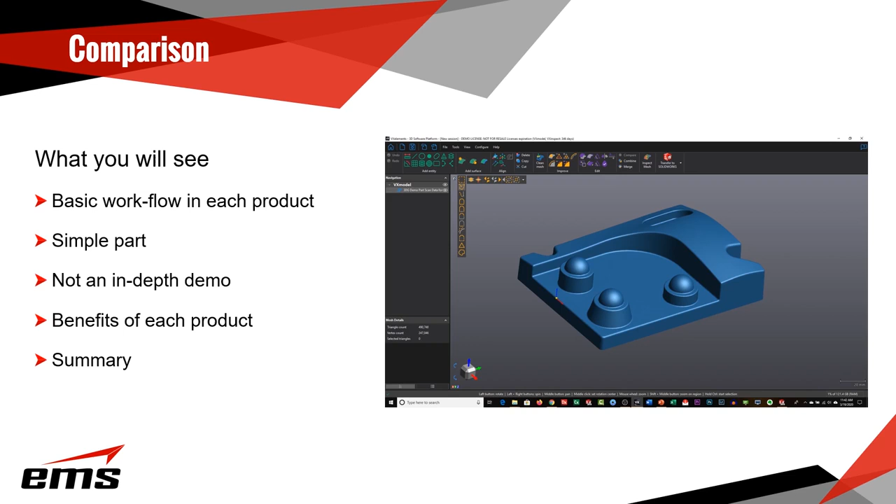And finally, we'll just kind of show a summary of the three different products and how they compare to each other. All right, so we are going to get started in VXmodel.

Now, what is VXmodel? VXmodel is sold by Creaform, so if you're using a Creaform 3D scanner, this could be a nice add-on because it allows you to kind of stay in the Creaform world, so to speak, for the most part.

You're going to see the workflow here in a minute. But basically, if you have a Creaform 3D scanner, you do all your scanning, and then you open up VXmodel, or just say import into VXmodel, and it brings that scan data straight in. It is an add-on product. The basic product from Creaform is called VX Elements, and that's your basic capture software, included when you buy a scanner. VXmodel would be an add-on.

So basically, when you're done scanning, you tell it you want to start modeling. So you'll see our model here. It was just a small plastic part. We scanned the top of it, didn't bother with the bottom because it's flat. And you can see that scan data.

So what we're going to do now is kind of show you what the workflow might look like. Now, just real quick, the interface - pretty typical. You've got a ribbon interface across the top, some different selection tools you see here, your modeling tree over here, and just some other details.

So the first thing we need to do is extract information, because the way this product works is we extract information from the scan data, and then we take it into the CAD system of choice and do the actual modeling. So we'll do a few things, and it'll hopefully make sense.

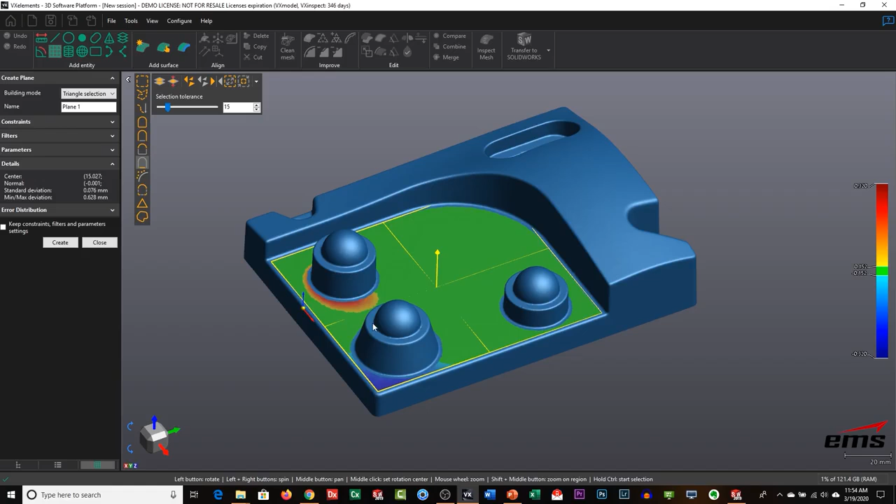So what I want to do is basically create a plane. One of the selection tools in here is called similar curvature, and if I click on the part, it's going to look at the curvature of everything and just select, in this case, what's mostly flat. And I'm going to go in here and say create a plane and hit - and you'll see it gives us, within a tolerance, what's everything in green is flat. We can see some blue and red - that's just telling us it's fit a plane through here, but it deviates a little because probably the part has a little bit of warp to it, but we're good with that.

So we've built our first plane. You can see it's right on there. So now I really don't have anything to set up that bottom plane, so now I'm going to create a plane by doing a plane offset, and we're going to select our first plane, and let's get this in kind of a side view so we can see it. And based on the vector direction, I want to go down, and I'm just going to manually click this.

So let's try maybe 12.5 and see how that looks. I'd say, yeah, that looks pretty good. And we'll create a plane, because it would be very difficult to try to pick the edge down here. Edges of scan data are never really reliable.

So that's given me two planes. I've identified this top plane and the bottom plane. Now, this out here is very curved, so we're going to have to do something different for that. But let's start with this.

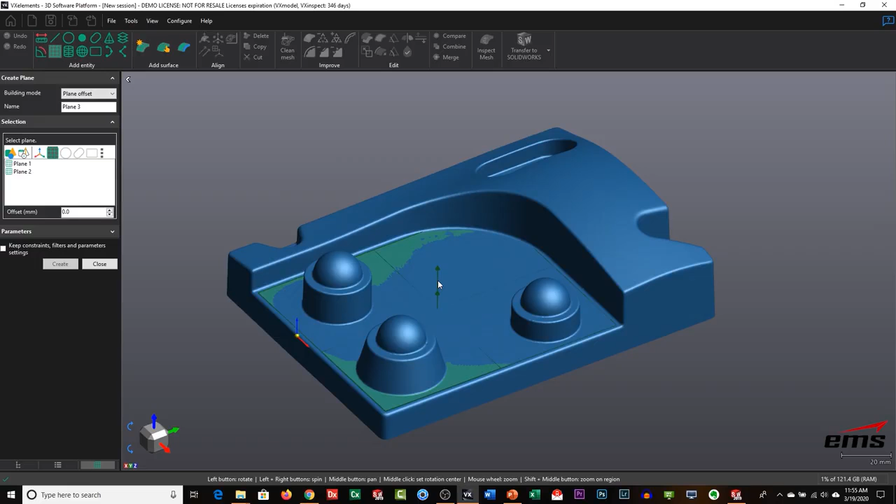So now I want to start extracting some basic profiles. I've got my two major planes here, and now I'm gonna get some profiles, and then we're gonna take all of this into, in this case, SolidWorks. We'll talk more about that in a minute.

Okay, so first thing I'm gonna do is create a cross section, and I'm gonna pick an existing plane. Let's start at the bottom, so that would be plane 2. And we don't want to cut it right at the bottom edge here because that data can be unreliable, and you can see the part's not perfectly flat on the bottom. So maybe we come up, let's try 0.1 and see what that looks like.

Maybe a little bit more. We want to try to get it to a point where we've got that line all the way around, which looks like we do. We don't want to go up too far because we have draft on this part. I'll say, yep, that looks good. And it's going to create that first cross section.

And then we're going to want to take one here because this is another prominent feature. So that was, I believe, plane 1. And this one we're probably going to want to go up a little bit more because we want to get away from the radius here. Maybe 1.25, let's see how that looks. Right, so we want to get off that radius, because the radiuses we're going to put in later. And we'll go ahead and say create.

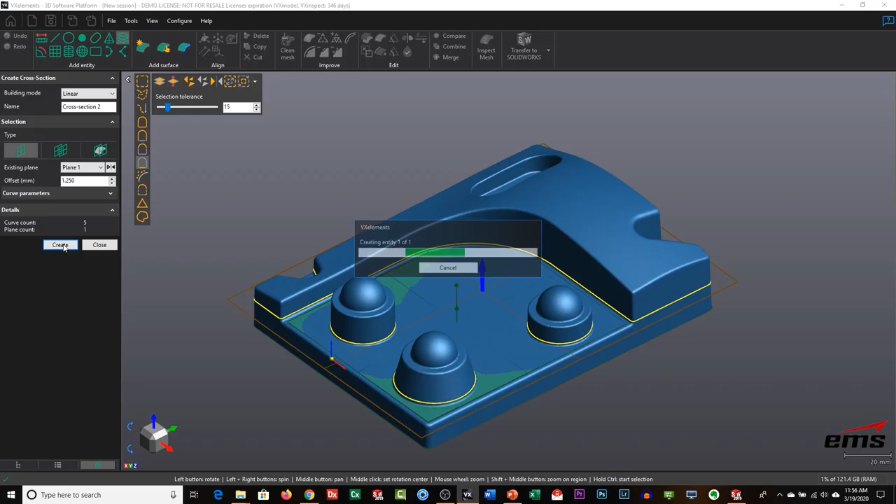So we've basically created the main bottom profile and then this cutaway profile. And we will repeat that process for the rest of these features, but we'll come back to those because we can do this in steps.

Now, the other thing, it's obvious right away that this has a lot of curvature to it. So we're not going to be able to just do a kind of a blind extrude. We're going to need to cut it off with this. So over here we've got some surfacing tools. There's auto surface, and that'll just build a whole patch of surfaces on the part, but it's not very intelligent. That's great for a very organic part. It's not good for a part like this.

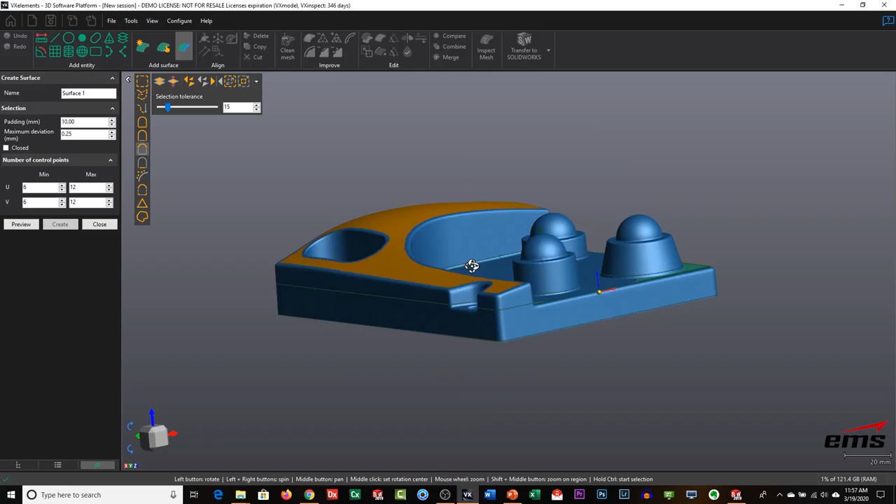And again, we're going to try that similar curvature feature because basically we're going to want the surface to fit to that. Let's see what a preview would look like. And we can adjust the amount of control points, how tight deviation-wise we want it to touch. If we really want to crank this down, let's try 0.1 and do another preview. That'll pull it down even tighter. So you have a lot of control over how well that surface fits. You can see we're extending out, which is fine because we're going to actually use it to cut later. So let's go ahead and hit create.

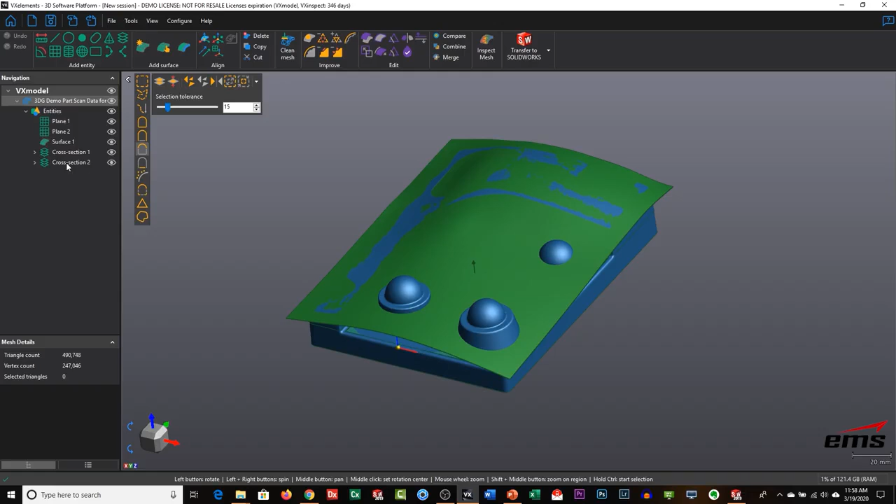Okay, so let's close out of here. And if we look at our entities in our tree, we've got a couple of planes, a surface, and a couple of cross sections. So that's enough to get started.

So the next step is to transfer this. Now we have two choices here. We can go to SolidWorks, Inventor, and Solid Edge right from here, or we could basically export out the geometry into like an IGES, STEP, or Parasolid. So we'll have different options. But since we're using SolidWorks in this demo, I select all the geometry, and then I hit Transfer to SolidWorks.

Okay, so here we are in SolidWorks. So the data is automatically transferred over. And if you look at what we have, the top surface, and then the two cross sections, and then the two planes that we created.

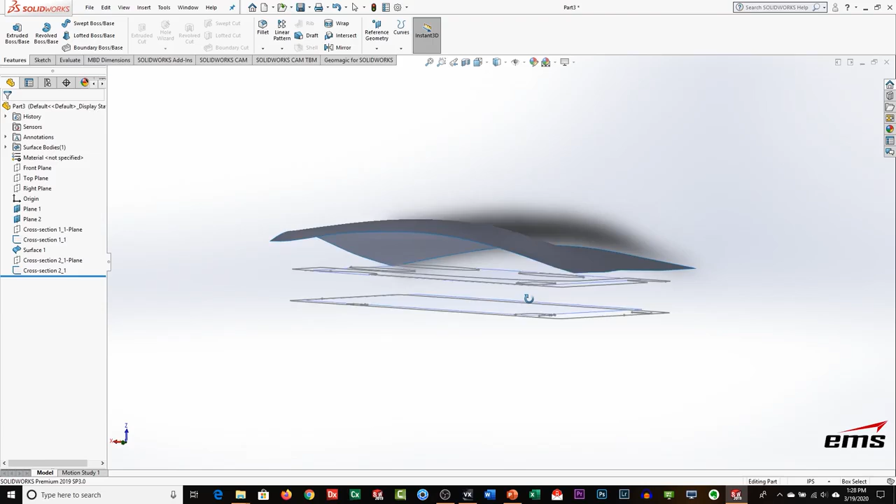So I like to kind of hide the things I'm not working on. It just makes things easier to work with. So I'm going to hide plane 1, and I'm going to hide cross section 2. And so now we just have plane 2 in that cross section.

Now, why did we bring in the plane and the cross section? Because if you remember, they're not at the same level or the same height. The plane is right at the bottom of the part, and the cross section is up just a little bit so we can get that nice cut.

Also, what is this cross section? Well, it's a polyline, just a bunch of points on a line, not a line like a 2-point line. And if you had fillets or radiuses, they wouldn't be - it would just be points. So it's not the best geometry to be solid modeling from.

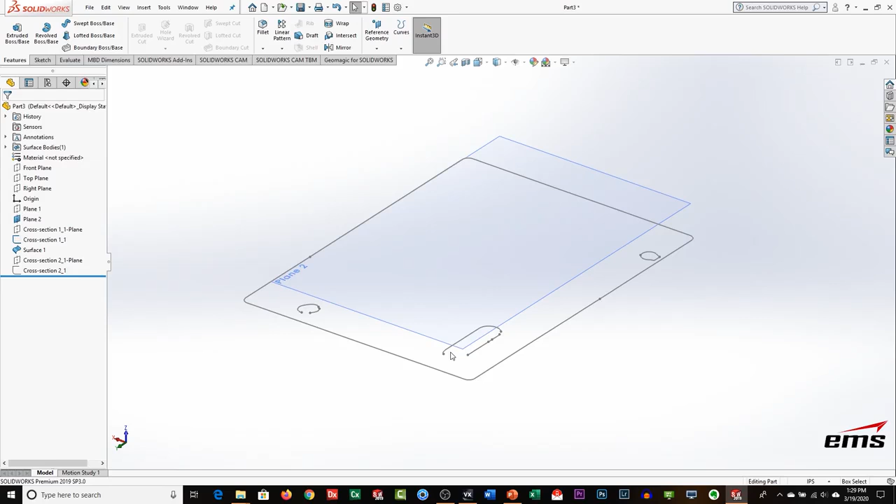Also, you can see it's incomplete. If the scan data isn't complete right there, you're going to have holes in it. So what we're going to do is just use it as reference geometry and build new sketches.

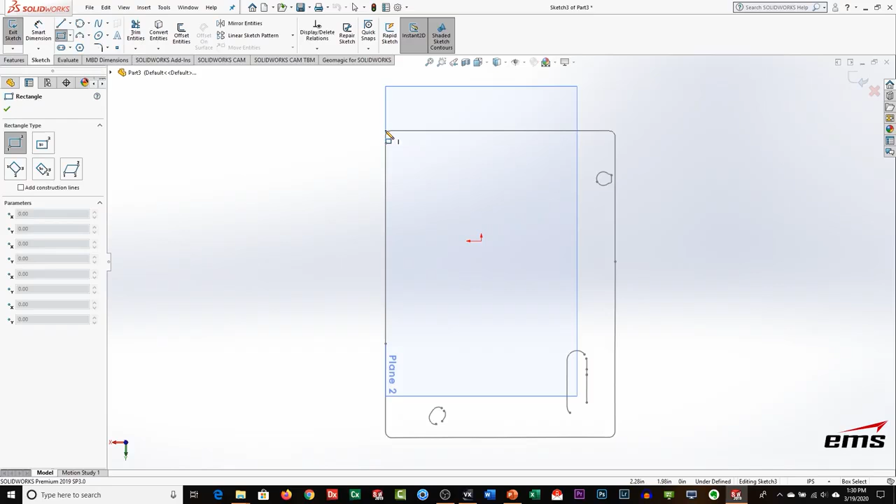So what we're going to do is go to the sketch command and pick this plane because we know it's right at the bottom. Let's go ahead and get into a top view. We're going to basically trace around this geometry, but with the real sketching tools in SolidWorks. So I'm just going to line up the corner, then come down here and line up and try to get right over the top and build that first rectangle.

Now, the rectangle, of course, things will be parallel and perpendicular. You can add other things if you want to dimensionally drive this and add all that, you can do it. We're not going to, for time in this demo, show all that. But you have all your normal sketching tools.

Normally when you scan something, you're scanning the manufactured part, which is not going to be perfect. It's going to be slightly bigger or slightly smaller because of shrink and different manufacturing processes. So you can override all that just like you would on a normal sketch.

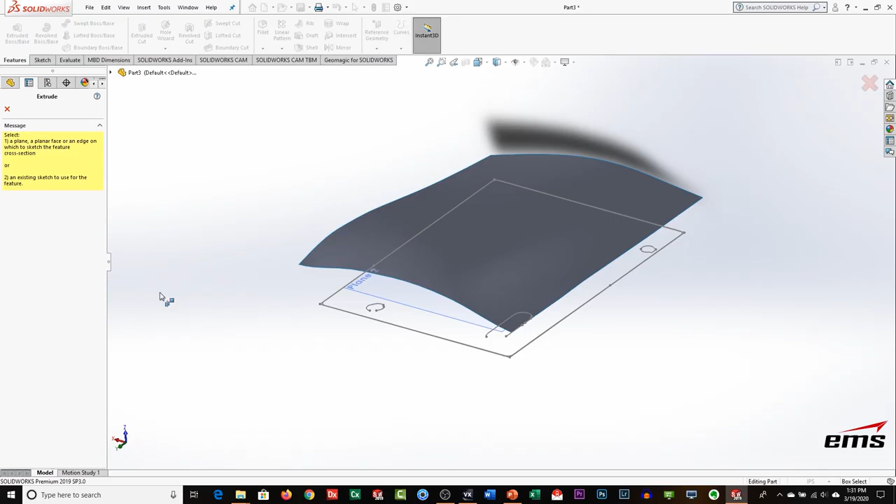Okay, so there's our first sketch. We can now exit out. And now we want to turn back on our surface, and we are going to go to Features. Again, we're using all SolidWorks commands, and we are going to want to extrude, using that new sketch we created.

Now, we don't want to go blind. We could, but we know the top of the part has some real shape to it. That's why we extracted that surface, and now we can use that to automatically fit right to it. The only other thing we want to do is add draft, usually 1 or 2 degrees for an injection mold in this case, and then hit OK.

So let's go ahead now and hide that surface, and you can see very quickly what we have. We have a nice, the major shape of the part with that very complex, very organic top that it has, very quickly.

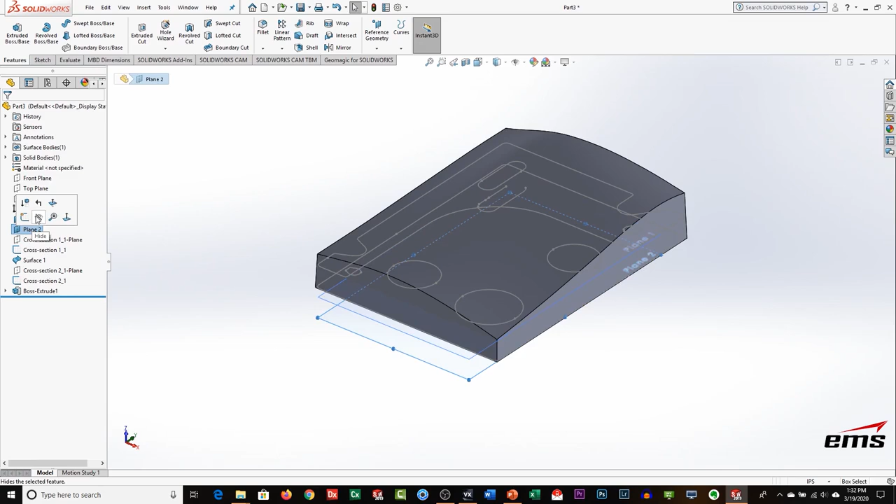So next, let's go ahead and show the other cross section and turn on the other plane. Let's hide this one and hide this one - for me, it just makes life easier. Okay, so we pretty much want to do the same thing. We want to now make this, in this case, a cutout. So same process: we come in here, we hit Sketch, we pick our plane.

Let's go to a top view, and then however you would trace over this. So I'm going to start with a line here and just run it out - doesn't matter where it goes. And let's go here and same thing. And then we'll just kind of close it off out here somewhere.

And then the last thing we're going to do is create our fillet, and that'll be here and here. We want our fillet here and there, and let's type in our amount. Let's try 1.5. Let's try 1.75 and say, hey, that looks pretty good, and go ahead and take it. Then now we'll go ahead and exit this sketch.

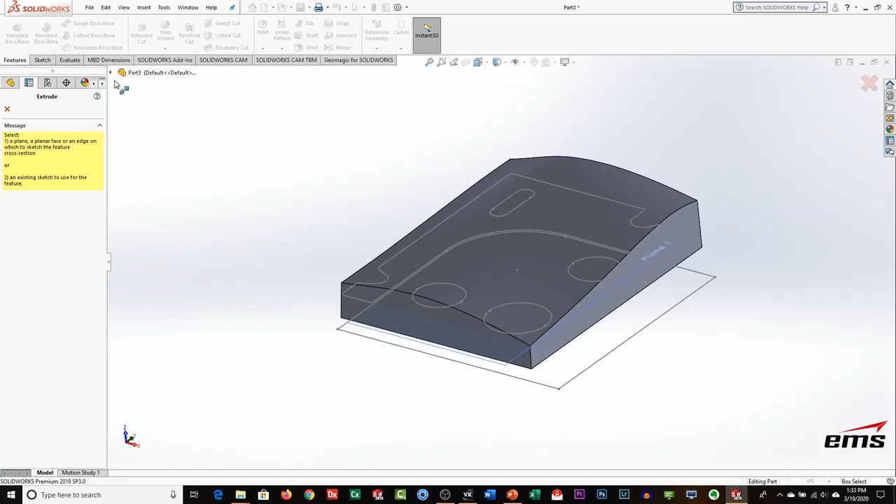Okay, so there's our second sketch. And now we are going to want to do an extrude cut, and in this case, sketch 4.

We're going to go up. And then for this one, we're going to want to also add draft, but we're going to want to draft outwards, right, because we're going to cut it away. So let's go ahead and hit OK. That's going to give us our draft.

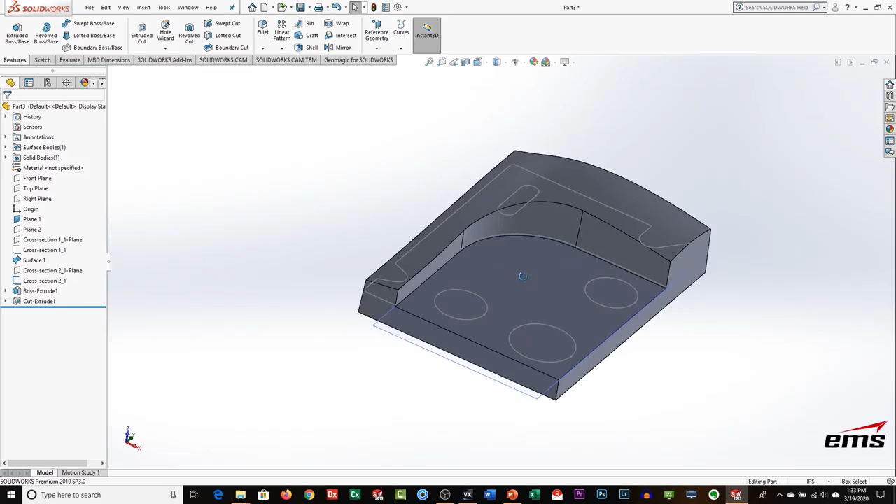So again, very quickly, we have created a good majority of the shape. That's bringing in a couple of sketches and doing some extrudes and cuts. Next, let's show what you might do with some primitive objects, some primitive surface or solid objects.

Okay, so we're back now in VXmodel, and we want to continue on. Let's go ahead and hide the surface and those two planes for right now. And let's take a look at this geometry here.

So we're going to do this geometry a little bit different because these are more prismatic shapes, cones, cylinders, spheres, things like that. So what we're going to do is extract that information as primitive geometry and then take that into SolidWorks. So let's start with the spheres.

And again, we're going to use that curvature-based selection tool and then go ahead and hit Create there. Create there, and create there. So what this has done is it's actually built solid model geometry by fitting through that scan data.

Now you could also set up a center axis and then cut a section and then do revolves. That's certainly a way to do it, but I thought we would show some of the other commands. Now, let's go ahead and do these.

Theoretically this is certainly a cone, but actually these two are cones too, in the sense that we've got draft on these walls. So we could do it either way. We could do it as cylinders and then change it in SolidWorks. Let's just go ahead and try to do it all as cones.

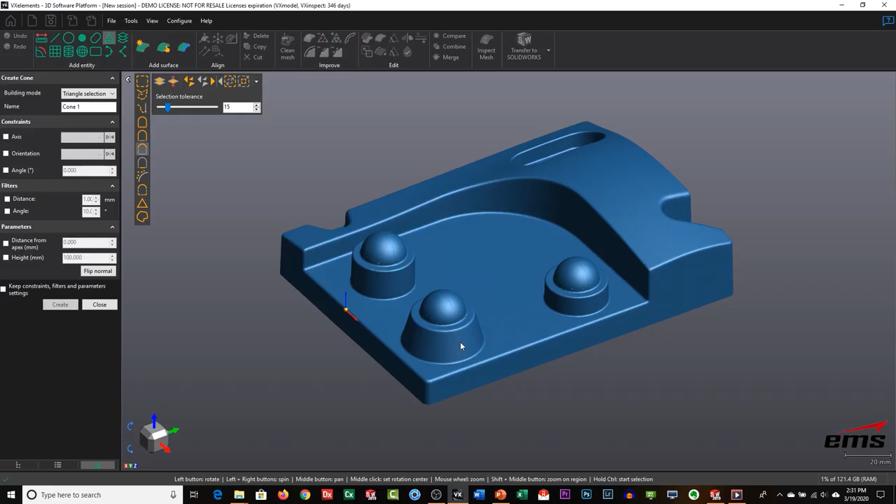So now what we're going to do here, because the way that curvature-based works is it's going to stay away from the corners because of the radii there, right? And so you can see our geometry then only fits to where our selection was.

Now, we do have some things we can change over here, like the height or the distance from the apex. So, for example, if I change the height, let's spin this around so you can maybe see it from underneath. You can see, and I'm purposely, what I want to do for this is just get the bottom to go down a little bit farther.

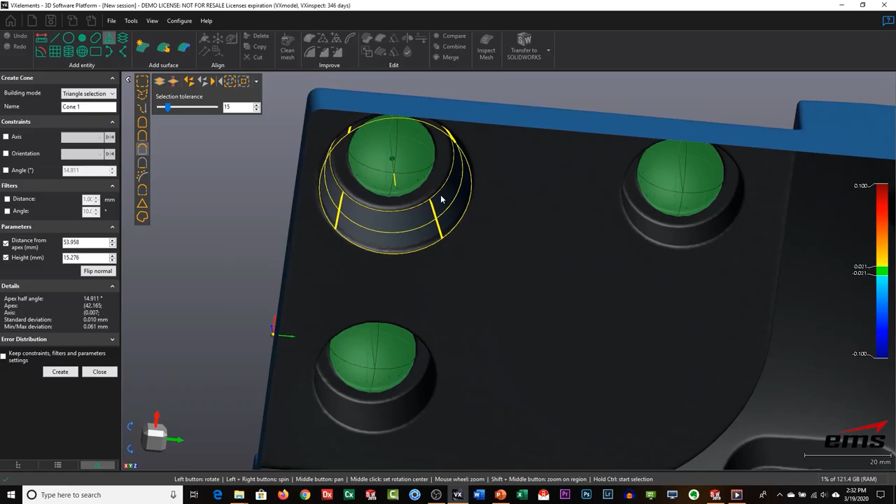This will make sense here when we go into SolidWorks. The top I'm not so worried about, but the bottom I want to carry that curvature down into the part a little bit, and then I'll hit create.

Okay, so we'll do the same thing here with that. Let's flip that over, and let's increase that one a little bit as well, and hit create.

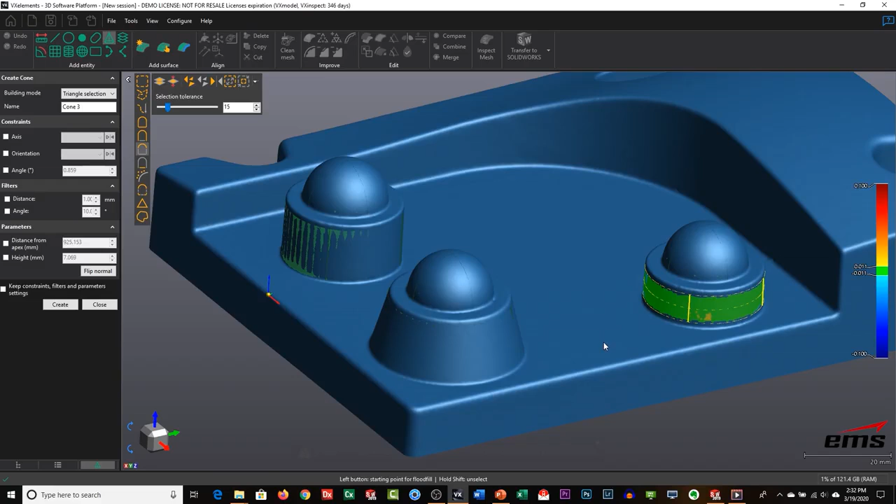And then finally this one here, and change that height. Okay, and that's good, and then we'll hit create.

Okay, so once we have those, now I'm going to need a couple of planes. If we look at the, let's call it the shoulder or the top flat area here, there's a couple ways we could do this. We could certainly offset this big plane and move it up. That would probably be the right way to do it to make sure it's parallel.

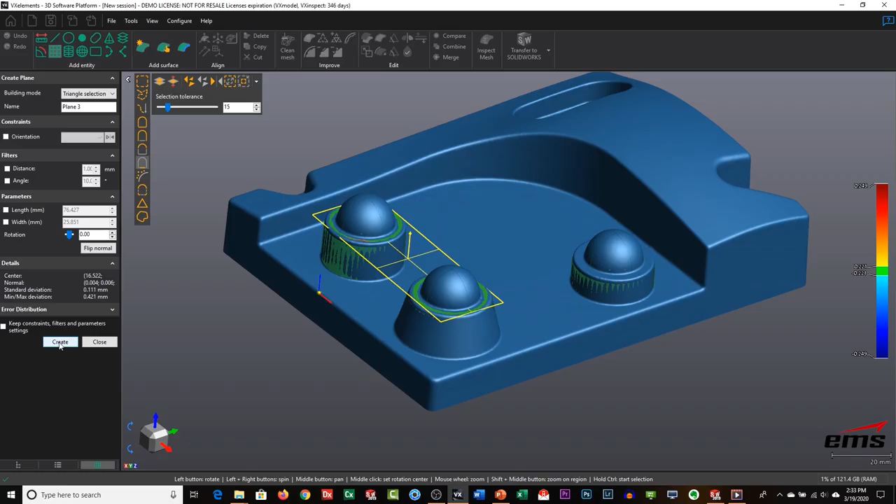If I'm not real worried about it, I'll just do it this way, and I'll sample data from both of those. The only danger here is it's not guaranteed it's parallel from this, but just to kind of show you a couple different ways of doing things, we'll just go ahead and do it.

And then same over here. And the reason I need this one is because it's at a different height. Okay, so let's close that.

Back to our tree. So we're going to want this plane, all three spheres, and then all three cones. Okay, and just like before, we hit the transfer to SolidWorks button.

Okay, so now we're back in SolidWorks, and what's nice about this is you can go back and forth, and it automatically just keeps bringing in and updating your current model. So you can see we've got our geometry in here, and first thing we're going to do is take and edit some of these features.

So we'll grab this one here, and we're going to change it from a blind extrude to up to surface. And we're going to pick that plane that we created that we know is at the correct height. And then we'll do the same thing here. Change that up to surface and pick that plane and hit OK. And then finally this one here.

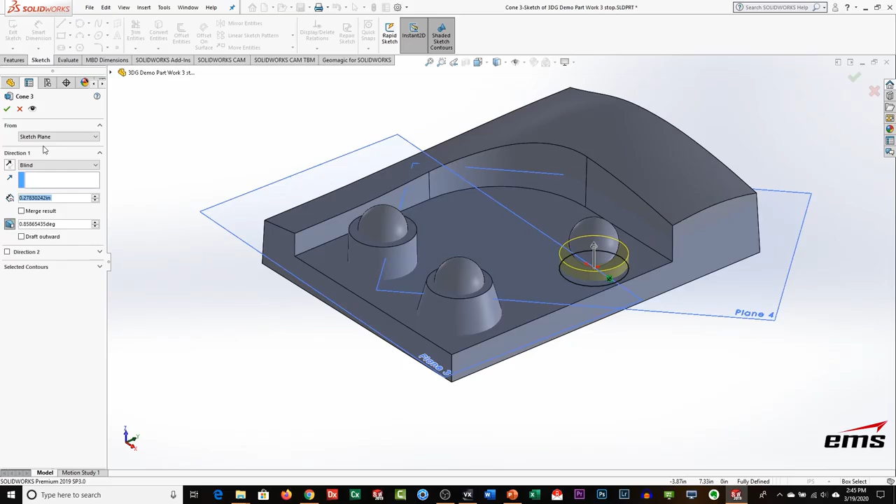Up to surface, and that's plane 4 in this case. We've automatically adjusted the height to be proper on those just by extracting that plane. Now the bottoms, we just ran down into the part, and all we need to do now is go to Insert Features, hit Combine, and combine all this geometry together to make one solid body.

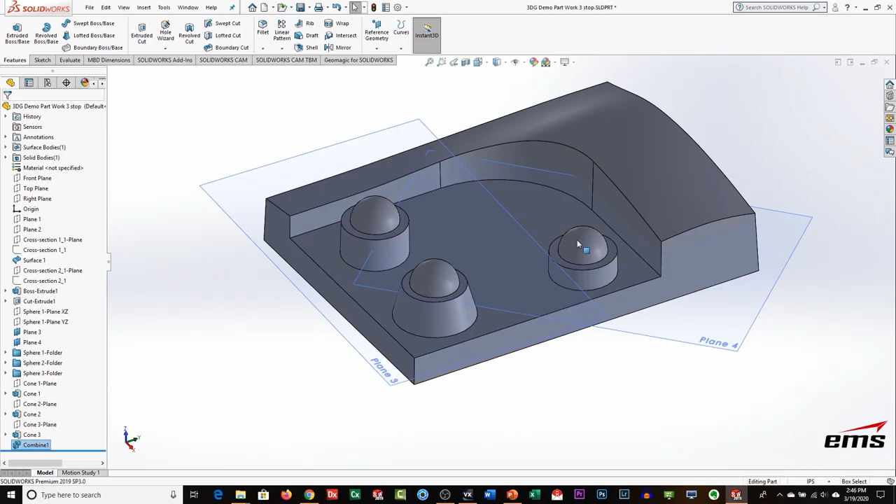So it will get all the proper trims on those. That's how you would do more prismatic stuff. So just to recap, we extracted planes and then cross sections, brought those in, built SolidWorks actual sketch entities, and then did some extrusions, one with a cut for the surface where we extracted.

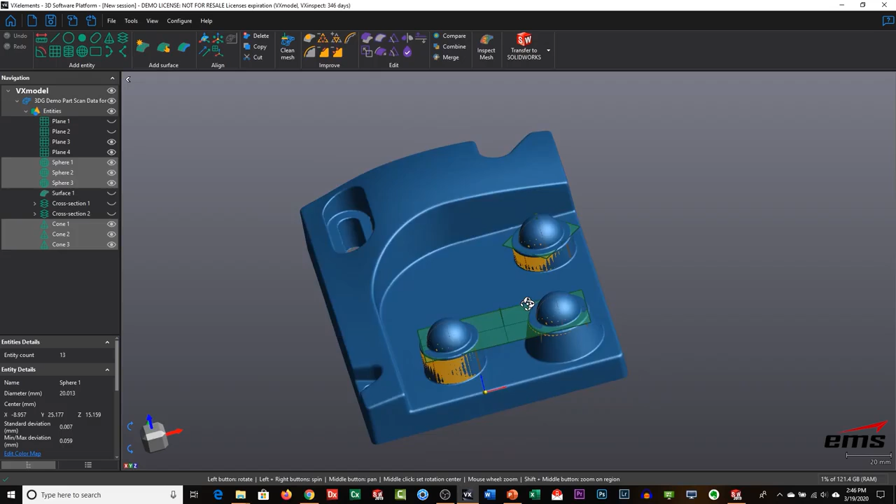Let's go back into VX Elements and look here. So all we really have left is a few more cutouts and holes, and we'll just use cross sections for those, but you get the idea. It's really just the same process over and over.

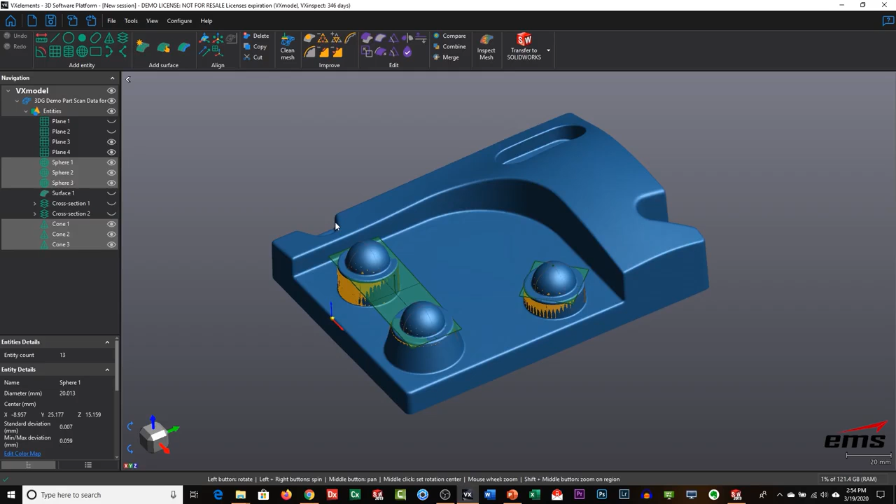So again, in VX Elements, you create some geometry, and then you either extract it straight into SolidWorks, Inventor, Solid Edge, or you export it into IGES, STEP, Parasolid if you're using a different CAD system, and do it that way. It's just an extra step of exporting and then going into your whatever CAD system and importing it. But that's the basic workflow using VXmodel.

All right, so just a summary of VXmodel. Starting with the benefits, one of the main benefits is it works directly with Creaform 3D scanners. So if you're already in that world, you could go right into the VXmodel module just with a click of a button. And it's not to say this won't work with other scanners. Theoretically anybody could buy VXmodel and import scan data, but the typical customer is going to be a Creaform customer. The product is very easy to use.

Creaform has some great e-learning tools and help guides and tutorials, very, very good stuff. It's fairly easy to learn on your own. It has direct links to SolidWorks, Inventor, and Solid Edge, but you can work with any CAD system by outputting those neutral file formats. And finally, it's the lowest price of the three products we're going to show here. Now we're not going to get into pricing because pricing can change and it's different in different parts of the world, but of the three products, this is the lowest priced of them.

And then finally, things to consider with VXmodel: it's not a standalone CAD system. You can't do all those CAD features, sketching, extruding, making drawings, assemblies. You're really just using it as a tool to extract information and take it into a CAD system, so you really have to have a CAD system. And it does have limited features.

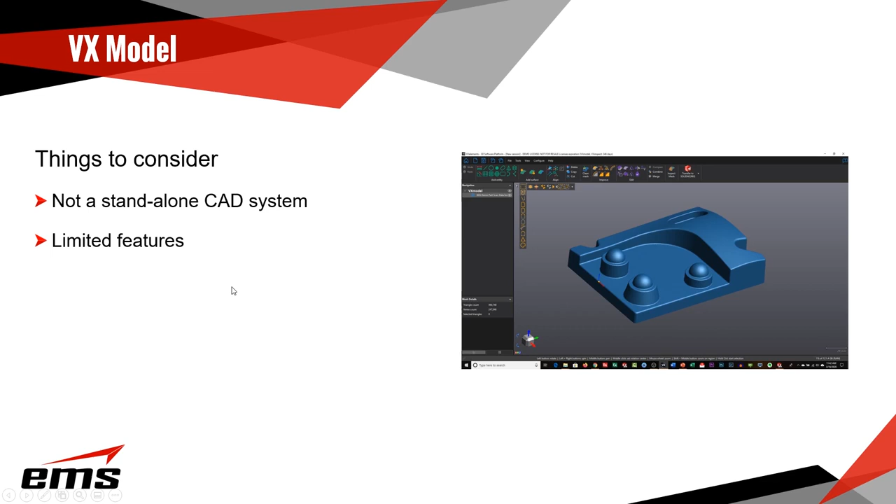It's great on kind of sketch-driven parts and some basic surfacing. There's also some auto surfacing, so you've got some decent all-around tools, not as many as some of the other products, but those will come at a higher price. But if you want a basic system to be able to scan and extract information very quickly in an integrated system, it's a great product to consider.

All right, so next up is GeoMagic for SolidWorks. Now the way this works, let's go ahead and start a new session here in SolidWorks, or a new part. This runs truly integrated inside of SolidWorks, so you'll notice Feature, Sketch, all your normal SolidWorks stuff is here. And then down on the end here we have GeoMagic for SolidWorks, and it's got some tabs, or more of the ribbon style. So the first thing we're going to do is import scan data.

And let's go ahead and import our scan data we created. So we would have exported that, in this case, from VX Elements, but this will work with any scanner. You can even do live scanning right inside the software. I normally don't do that, but some people want to be able to scan right in here. I like to just save it and then import it in.

So here's our scan data, you can see we've clicked the import button. Now you've got some nice editing tools. You have some point cloud tools here, and then you have some nice mesh editing tools. And again, we're not going to go into these, we have other videos that show these in great detail.

But if you need to do some mesh editing, you can do it here. And then really the rest of this stuff is what we're going to be primarily using.

So we're going to start with the region group command, and we select that. We've got some adjustments here for sensitivity and connecting regions. The defaults usually work pretty good. We'll start with that, and if we don't like it, we can redo it.

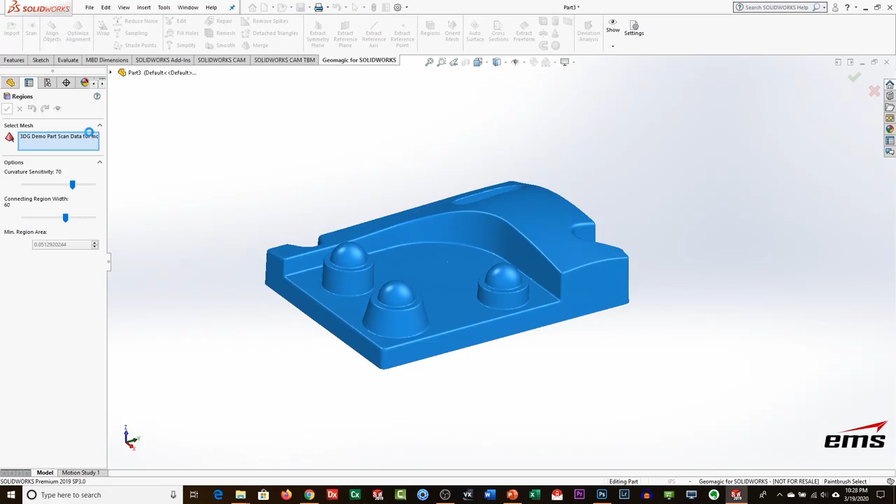What it's going to do is very similar to the VX model command, where we had it select by similar curvature. It's essentially done the same thing, but it's taken the scan data and color-coded the mesh. So you see planes, cones, spheres, even this freeform surface up here. All it's done is color-coded that mesh by groups.

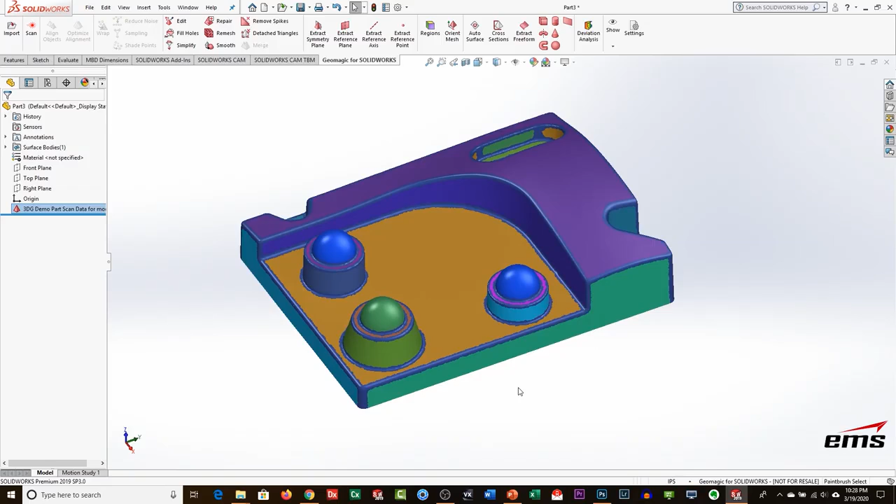It just makes selecting and working with them a little bit easier. We don't always do this, but for parts like this, it makes total sense. So the first thing I want to do, like we did before, is create a plane. I'm going to come to this extract reference plane and use select regions, but you can use other SOLIDWORKS selection tools like lasso. What's nice about the regions is I just click on it, and it's going to automatically fit a plane right through that region for me.

So if we now go to a side view, we'll use the SOLIDWORKS copy plane command, and we'll just drag this down. Again, we can key in an amount here, because trying to create a plane right off the bottom edge of scan data can be difficult. So that gives us two planes to start with, like before.

Let's hide the top plane. Now I want to create a cross section, and I'm going to pick this bottom plane, and we're going to want to move it up some amount like we did before. We don't want to cut right at the bottom. I'll go ahead and take that amount, that's fine, and then that's going to build a cross section through there.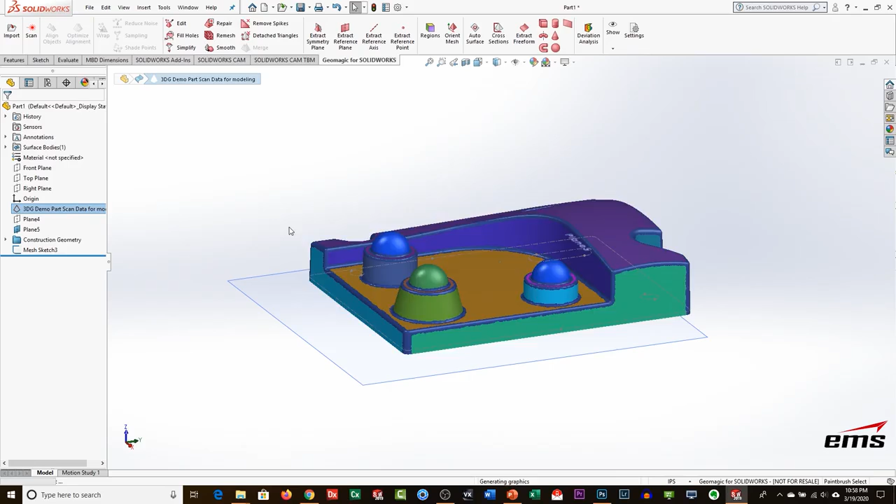So if you turn off the scan data for a minute, let's take a look. What it does is cut this through the scan data and basically build it as construction geometry in SOLIDWORKS, kind of like reference geometry. Theoretically, you could turn that setting off and it would be real geometry, so to speak. But like before, it's not perfect lines and tangent arcs and parallel and perpendicular. It's just reference. So we're just going to use it as reference like we did before.

So we will go over now to the SOLIDWORKS sketch command. We're going to pick the bottom plane, because we know that's right on the bottom. And then we're using SOLIDWORKS sketching tools, so let's do the rectangle again. We'll just kind of get it close, and you can add dimensions and all the constraints you want to add. That gives us our first feature right on the bottom, or our first sketch right on the bottom of the part.

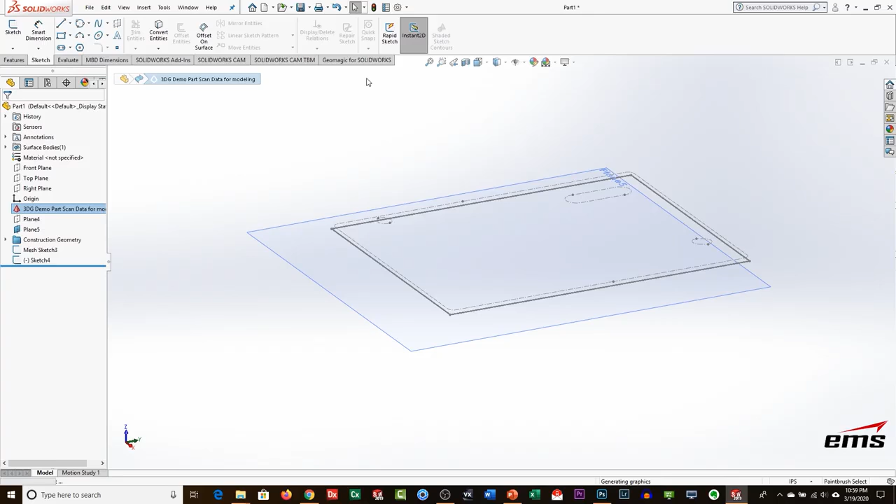So let's go back, turn on our scan data. And we're going to extrude up to that very organic shape at the top. So we've got a tool here called Extract Freeform, same type of thing.

We're going to pick the region group, and it's going to fit a surface. It's automatically going to extend it, and we can control how accurate it is, how far out we want to go, and basically build a surface skin. You can see that there.

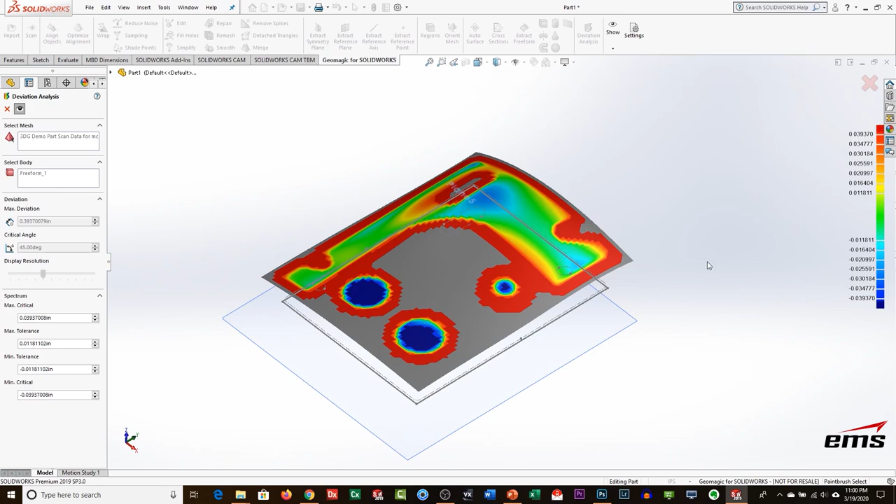Now, one of the neat things in Geomagic for SOLIDWORKS is I can do a deviation analysis on that. So if I pick this skin and hit this, it's going to show me how close it is to the scan data. You can see over here in green, and I can set what this tolerance range is. So we can see for the most part it's pretty good, but right here and here, it's actually cutting under a little bit. So we could go back and crank up the accuracy and do some different things to get it to fit even better.

Now, I'm not going to worry about it. It's not that critical for this in this case, so we're just going to leave it. So let's turn off the scan data again.

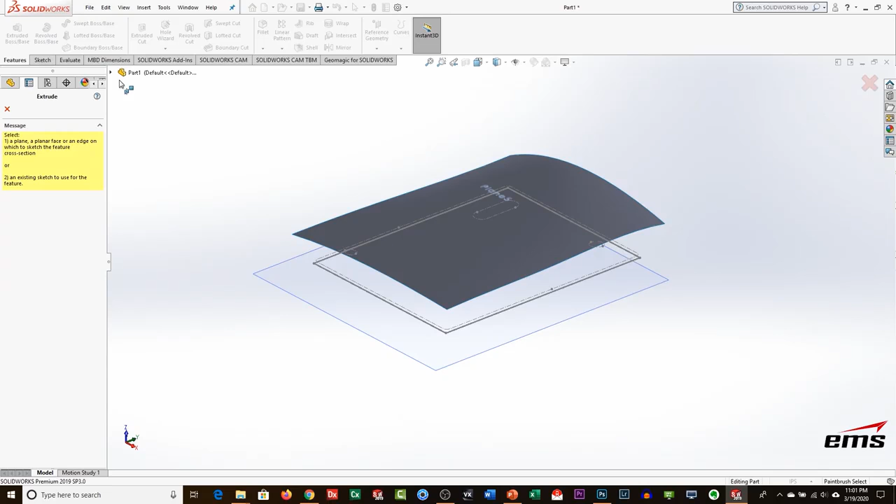And now we are going to do an extrude. We are going to pick, let's get our tree out here. We want to select sketch 4 in this case. Again, we don't want to go blind, we want to go up to a surface. We're going to pick that top, and we're going to create that. So let's hide that surface.

And you can see what we have. So we have that basic shape starting at the bottom and then going up to that very organic shape of this part.

Next, let's bring our mesh data back on for a minute. Let's hide our main solid body there, and let's look at doing our next sketch. We'll want plane 4 back on, I'll turn plane 5 off, and let's turn some of this other stuff off too. There we go, so that's the plane that sits up here.

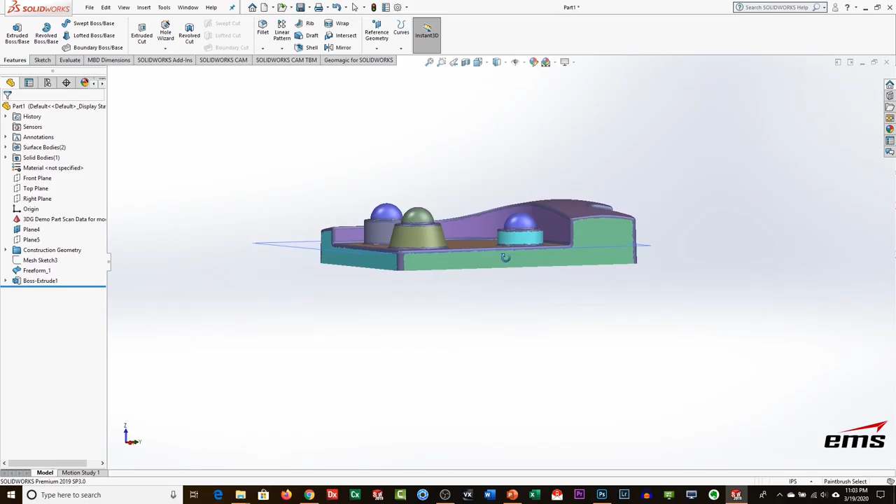And we'll go back in here and say cross section. We're going to pick this plane, and once again we want it to be up above, in this case, that little radii. And I'd say that value also looks pretty good, so let's go ahead and take that.

And let's hide our mesh. And again, we have that nice cross section there. So let's go to Sketch. Let's look at this straight on.

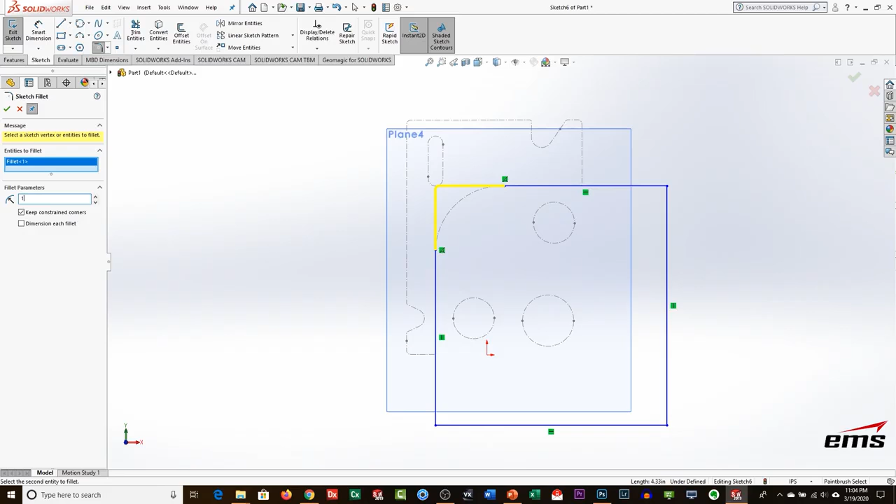And we will use a line and just kind of draw that out here, and another line here, and then just connect really the two anywhere out in space. It doesn't really matter. And we're going to use the fillet tool here. Let's try that again. There we go. And I believe this was 1.75, and we'll hit OK.

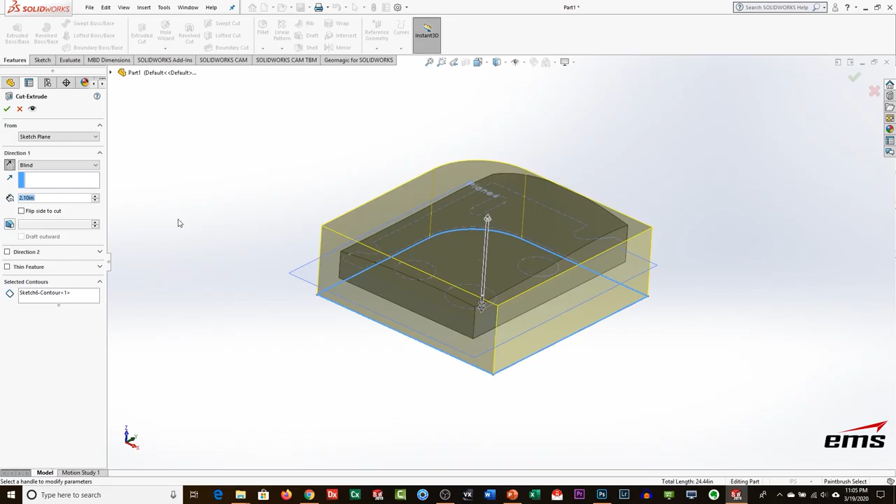So again, we've got a nice closed sketch. We can exit out. Let's bring our solid body back up, and back to features, extruded cut. I'm going to pick this, and we're going to go the other direction. We don't really care how far we go. And now we've made that cutout.

So let's start working on those primitives. We're going to bring our scan data back so we can take a look at it here, and we have some similar tools. Again, we'll use the cone command, and we'll just pick the region group. We're going to make this a new entity. And you can see the enlargements will allow us to make it go beyond the top and the bottom, especially the bottom.

So we'll go ahead and take that, and then we'll do the same thing here. Take that. And again, you can see how easy it is by just picking those region groups, which are all already defined.

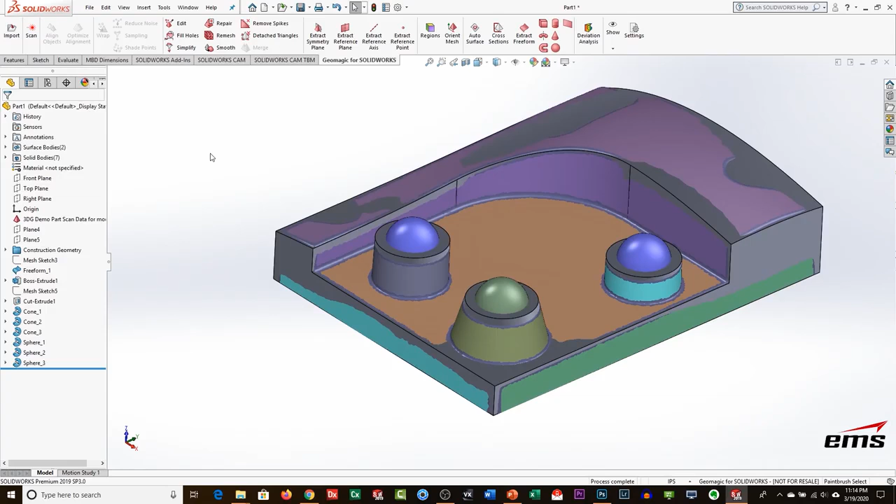And we're going to go ahead and do the same thing for the spheres. And you can see, if you look, you can see what it does. It's actually building sketches, so just like you would sketch and revolve. So if you ever wanted to go back and edit this, you can actually go and edit the sketch and it'll update the solids.

So now we have those. Let's go ahead and hide our scan data. And now we're going to want to trim this up. Actually, let's bring our scan data back on for a minute because I do need those cutting planes. So I'm going to extract, and we'll do it the same way as we did last time. I'm going to pick those two areas here and fit a plane, and then we'll do the same thing over here and pick a plane.

All right, so we have that. Let's go ahead now and hide the scan data. So what we're going to want to do is come under here and say Insert Cut with Surface. We're going to pick the surface here, and we're going to select this body and flip the normal. And that's going to cut it off at that plane.

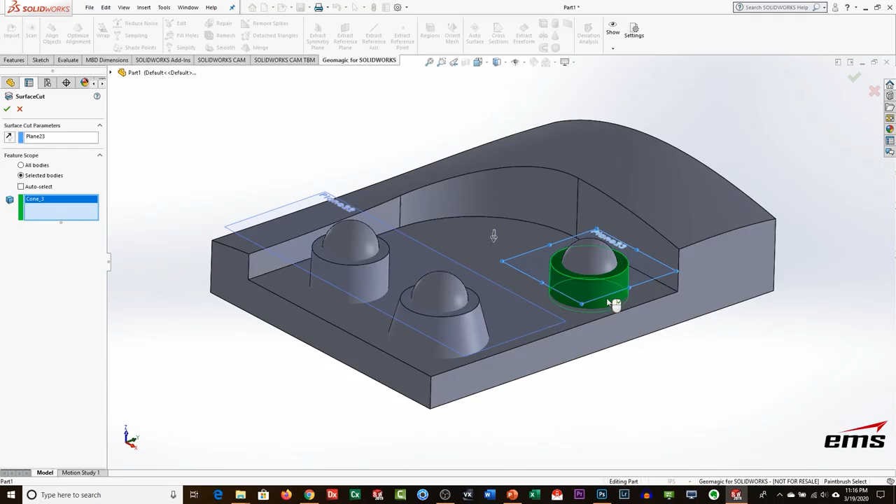We're going to do the same thing over here with surface. Pick this body here, and go ahead and cut that off. So that'll cut the tops at the right height there for us. And now we can go in and just join them all together.

All right, so if you look here, let's hide these planes, and you can see where we are. So let's bring back our scan data. And again, that accuracy analyzer tool, I can use at any time. So if I go here, deviation analysis, I select this body and say, show me the results.

You can see what that looks like. So it's a nice tool. Again, we haven't done these cutouts yet. We'll do those next. But I can look at this and say, hey, that looks pretty good.

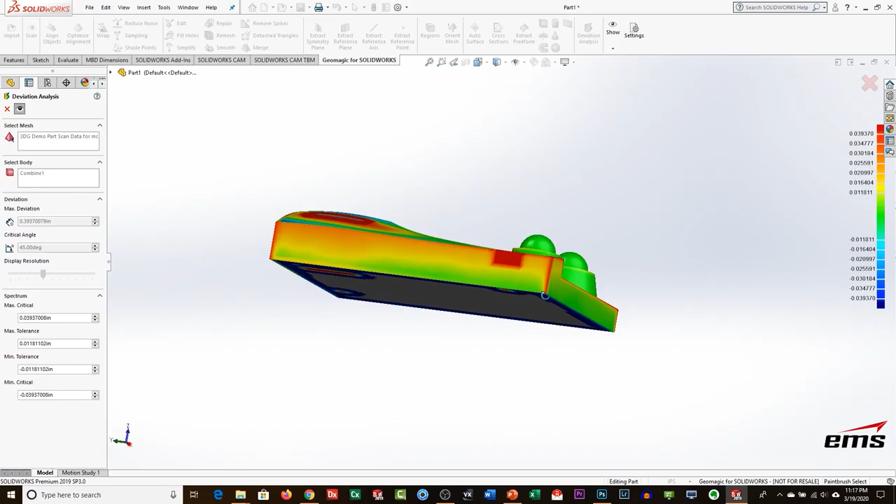Looks like we've got a little bit of bending here. We don't have our radiuses on here yet. But it's a nice tool just to kind of see how we did.

I think we forgot to extrude with draft, and that's certainly showing here. So we could roll back to the tree and do that. And that's the beauty of this is it's a SolidWorks model. You're working in SolidWorks. So let's go ahead and do that.

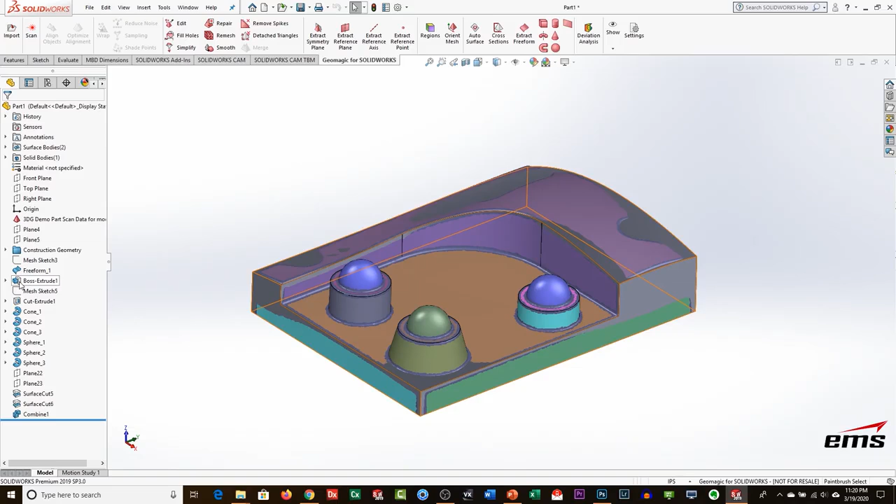Let's go back to this feature here and edit it, and let's add that 2 degrees of draft. So we'll fix that there. And then we also need to do it on the other feature, the other extrusion. And that one needs to go outward because that's a cut, and add it.

So now let's take a look at our deviation analysis and see how that looks. So you can see now this looks much better because we've added the proper draft.

So in this aspect, it's just like a SolidWorks model. All the features in the tree and everything acts the same way. So you can go back and make changes, and you always have that tree, and you can go back and update. So we'll go ahead and add the final features here and just show you the end result.

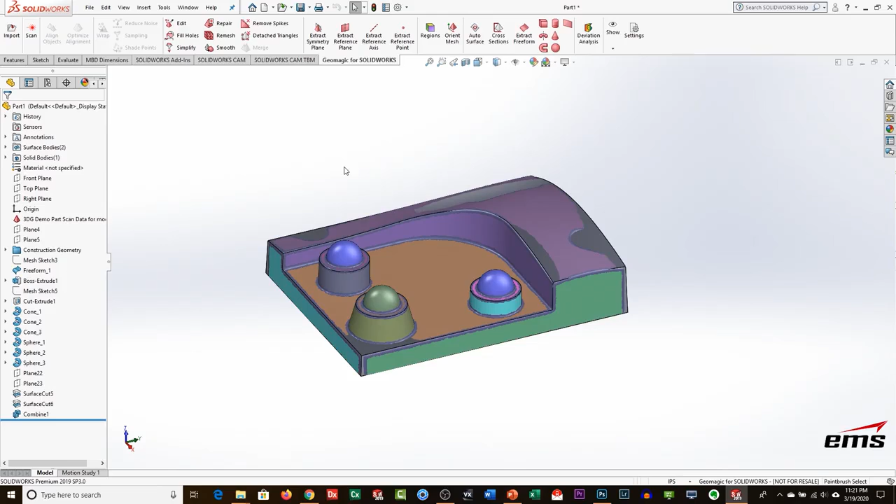Okay, so here's our final part. We added in those additional features, and then we added the radii to everything. We even went ahead and ran the shell command to make it like a plastic molded part.

And let's go ahead now, the last thing we'll do is turn back on the scan data. And let's go ahead and run that deviation analysis one last time. Pick our part and see how that looks. So as you can see here, it looks pretty good.

We've got a little bit on these contoured surfaces that we talked about, and that's just how tight you want to pull that down to. But if it's just aesthetics and you just want it nice and smooth, you can see. But overall, the part looks pretty good.

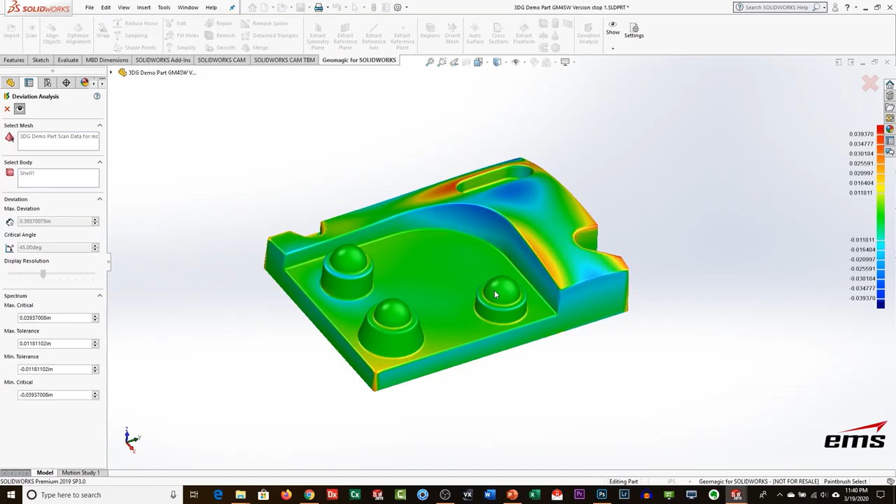We can see some yellow here. That's probably because the part itself we scanned was a little bit warped in that area, and we want to design it back to the as-designed, not the as-manufactured. But other than that, everything else looks pretty good on this part.

All right, taking a look at the benefits of the Geomagic for SolidWorks. Well, the biggest advantage is it works right inside SolidWorks. So if you're already a SolidWorks user and want to start doing 3D scanning, or even if someone did the scanning for you and sent you the scan data, you already know SolidWorks. So you've just got to learn some additional commands. So that makes it easy to use, again, assuming you know SolidWorks.

If you don't know SolidWorks, then you're going to have to learn SolidWorks as well as learn the Geomagic for SolidWorks. But you have access to all the tools in SolidWorks. We extract the data from the scan data, and then after that, we are using SolidWorks sketching and features and everything of SolidWorks.

Now, some things to consider is it only works in SolidWorks. So if you don't use SolidWorks, you use a different CAD system, this probably isn't the right tool unless you want to go out and buy SolidWorks, because you have to own SolidWorks for this to work because it plugs into it. It doesn't have all the features of Design X, which we're going to get to next.

And it will struggle with large data sets. One of the challenges of trying to build this into SolidWorks is SolidWorks is not built for huge 3D scan data sets. That's not what it was intended for. So when we start to get into larger ones, it will really slow it down. And there are some tricks to working with it, but it could be a challenge.

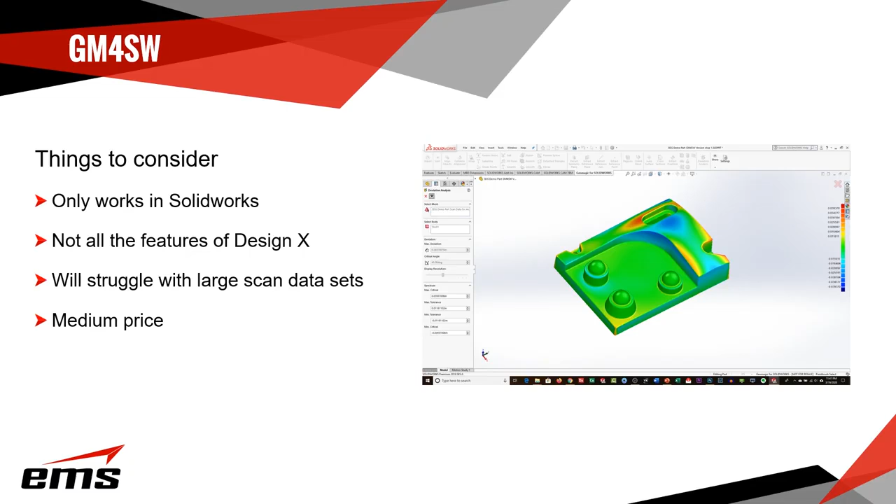So one advantage of Design X is you don't need another CAD system at all. Now, it doesn't do drawings, it doesn't do assemblies, and it doesn't do a lot of other things that SolidWorks and other CAD systems do. But if you wanted or needed a standalone modeler, this would be the choice.

Now, again, we have very detailed demos on Design X, and we're not going to go into all that today. We're going to try to just create the same workflow just so you see how it works.

Similar ribbon style interface. You've got menus along the top for solid modeling, surface modeling. It's got all kinds of mesh editing tools, tools for working with point cloud data, which we're not going to get into today, but certain types of scanners work in point clouds, so it's got all kinds of tools for that. I mentioned the mesh editing, and 3D sketches - it's a very deep product, very robust. But today we're just going to focus on this workflow.

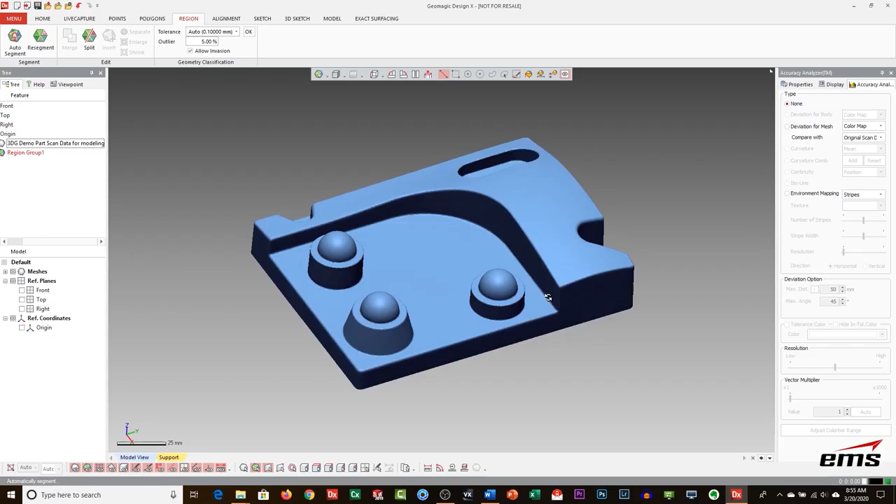Okay, so like we did before, we're going to create some planes to start out with. I go to my plane command, and you can see all the different ways I have to create a plane - that's one of the advantages of DesignX, it's a very deep product with so many ways to do things. So I'm just going to use the extract and pick the plane on there, and if I do a little preview it shows me the data it's going to use, and I get my first plane. Let's jump into a side view, turn off the mesh for a second, and we'll drag a plane down and then turn it back on.

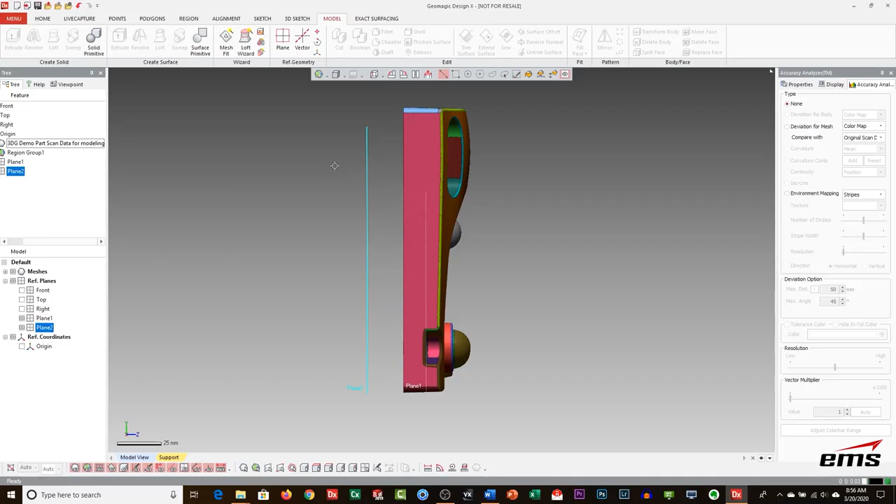Again, there's so many ways to do this. If I double click the plane and go to offset - I'm working in mils here, you've seen me going back and forth from mils to inches. I work in both, but you can set ahead of time if you want to work only in mils or only in inches. All of these products are capable of doing that.

Okay, so we've got our bottom plane, and like before, we're going to want to create a reference sketch, or mesh sketch as it's called here in DesignX. We've got a sketching tool that allows us to do mesh sketches or just 2D sketches. And because it's a full CAD system, I can just create geometry even without scan data, which would be more 2D sketches. But we're going to do a mesh sketch on this bottom plane.

Same thing, we're going to want to sample it up, and you can see this is interactive, so I'll move it up. I can either type in a value or just use the slider there, and then hit OK. Now, one of the differences is this mesh sketch will be right on the bottom surface. Let me hide the mesh - so instead of being offset like the other products, even though I moved up the plane to sample it, it's actually going to put it right down on that bottom plane, which would have been plane 2. So I don't have to worry about it - it's a little different in here.

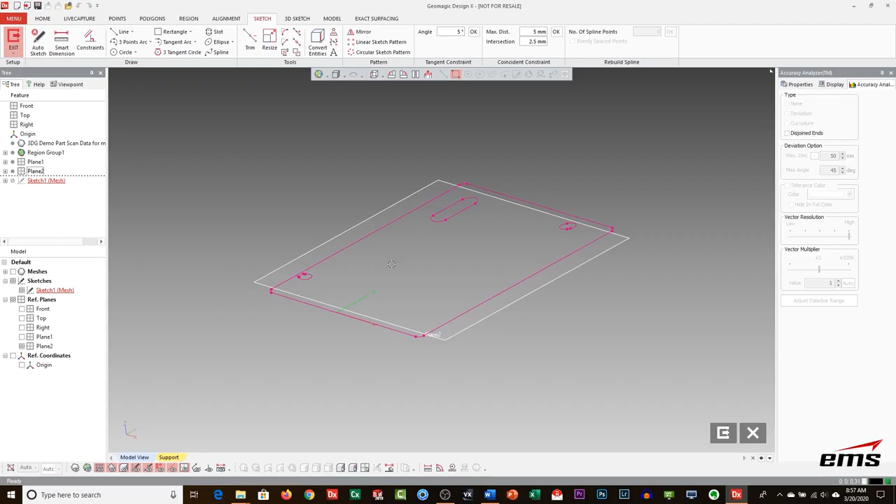Okay, let's go to the top view, turn that plane back off, and then I have all the sketching tools - same sketcher as SolidWorks, so it should look pretty similar. One nice thing is I can just window in on the area I want. I could do the rectangle - I'm just going to do it this way here to show doing it like this, but again, I could do the rectangle and window it in.

And then you can do all your things like make it horizontal, perpendicular, basically add all your constraints. You can add dimensions and so forth. But let's go ahead and do it - I just wanted to show that, but let's keep things consistent. Let's do the rectangle.

And again, I'll just kind of eyeball it, and it kind of snaps right to the geometry, which is nice. But again, I can always just move things around.

Now, one of the things we can do in here is we've shown the 3D deviation in Geomagic for SolidWorks, but here we can actually do it in 2D. I'm going to amplify this little slider so I can see it better, and let me zoom in and explain what we're doing.

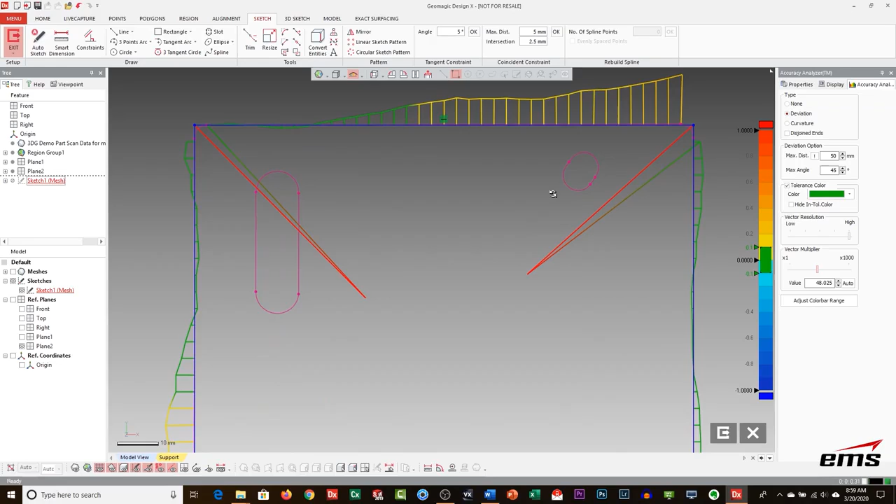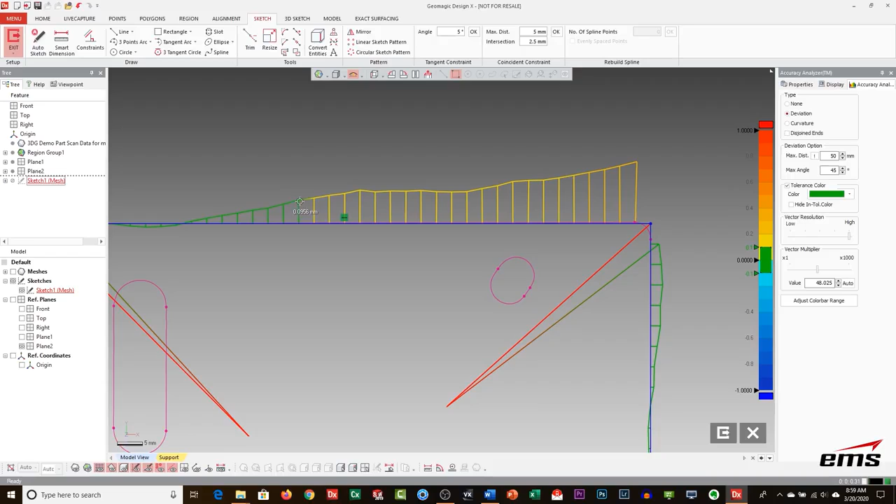So the pink line is the scan data, and the blue line is our new CAD data. If you hold your cursor over one of these whiskers, you can see it's green up to 0.1 millimeters, or 100 microns, which we're saying is good. If I highlight over these, they're all good, and then you see it turns yellow as we approach whatever tolerance we've set, all the way up to here.

So what's really neat—what does this tell me? This line down here, we're pretty good, right? You can see we're right on. But as we go over here, we can see this part is not straight. It's got a little bit of angle to it. And again, we're scanning an as-manufactured part.

That's very typical. But one thing I can do is sit here and move this line to try to average out that deviation, okay? So I could go around and do that. That's a really cool tool.

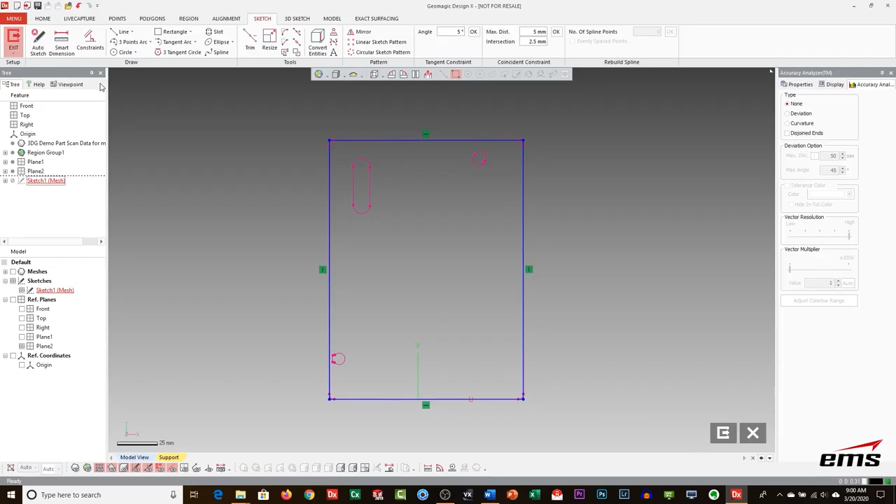So you're basically doing a 2D accuracy analyzer right here, right on our sketch. We don't have to wait till we've turned it into a solid body. That's something really nice. And again, you can add all your dimensions and constraints—we're not going to do that here for time purposes, but you see that. So there's our first sketch. Let's bring our mesh back on, and you can see we've got our bottom sketch there, okay?

So let's go ahead now and create that mesh fit surface. We're going to go back to our modeling tool, hit mesh fit, and just pick this region. Again, we have a lot of tools in here to do this—we can go by control points, by deviation.

We can adjust the smoothness. I'll show you this manipulate UV axis—there are some really neat tools here. So for example, let's go to step 2. You can actually come in here and pull these little UV nodes around.

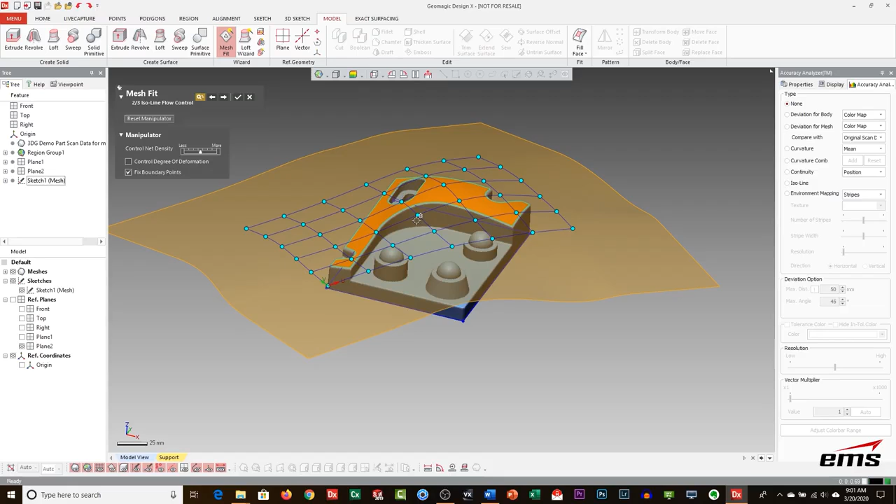Maybe you've got a certain area you want to adjust. This starts to get really technical, and that's the thing with Design X—there's a lot of depth to this product, like I said. So you can tug these around, and that can influence the surface.

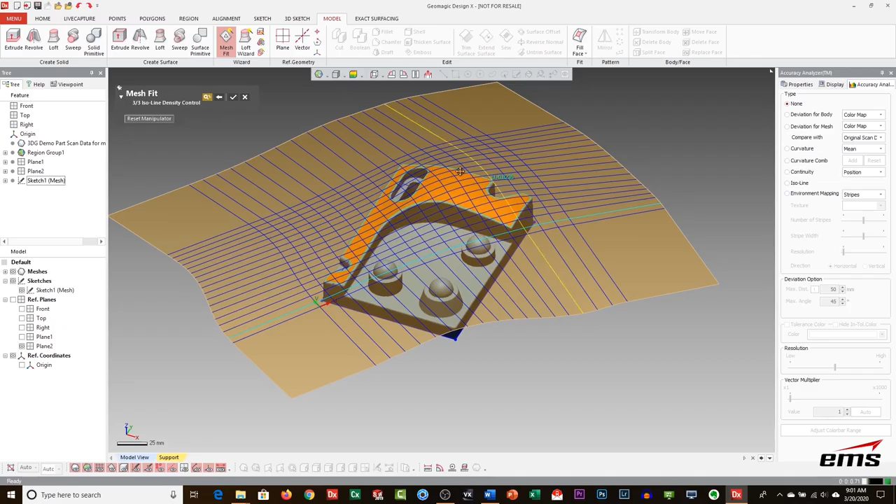And the other neat thing you can do—I told it 20 by 20 control points, but I could come out here and move things around, copy them, or delete them. So let's say I didn't want that one, and I could actually pull one off here and move it. When you get into some really heavy surfacing, some of this can make a difference in how it controls it. Let's just kind of take it, and you can see what we've got.

Now, again, we can do that deviation map like we did. Let's crank the resolution up here and redo that. Ignore all this because that's down below, but we're really looking at this—you can see I've pulled that nice and tight. Another neat thing, let me turn off that sketch—if I hold my cursor over, you get this little readout, and that's the distance between that surface and the scan data, okay? That's a really nice feature.

And again, we're building a history tree over here just like you would in SolidWorks or anything else. So there's that surface we need. Let's bring our sketch back on, and we are going to do an extrude. We're going to pick that base sketch, and then we have all kinds of options. One of them is—so we're doing a blind as the default—we can go through all, to a vertex, to a region, to a surface, etc.

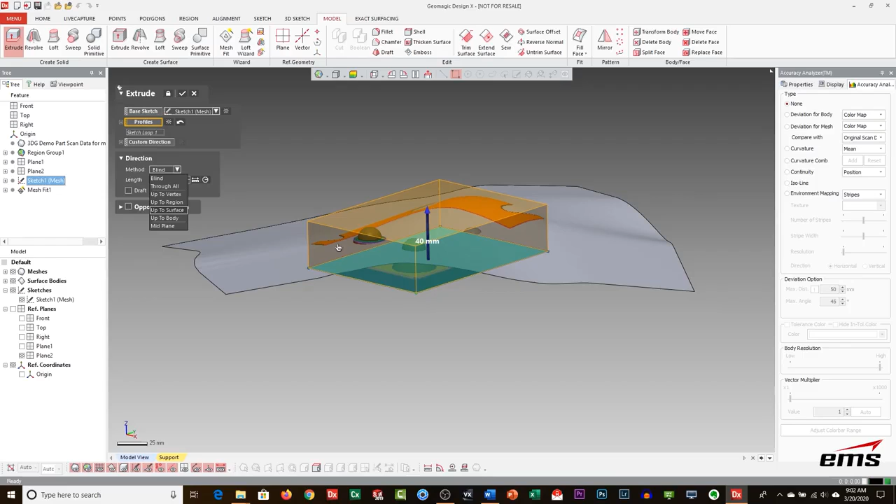Now, what's neat is a lot of times I don't even need to build this surface. If the region fully encased where this would extrude up to, I could just pick region. But because it's only this area here, it won't work—that's why I needed the surface. So we're going to go up to the surface.

And then hit OK. And if we hide the surface, you can see what we have here. Now, we also can always go back. Let's go back to that extrude because, again, I forgot to add draft.

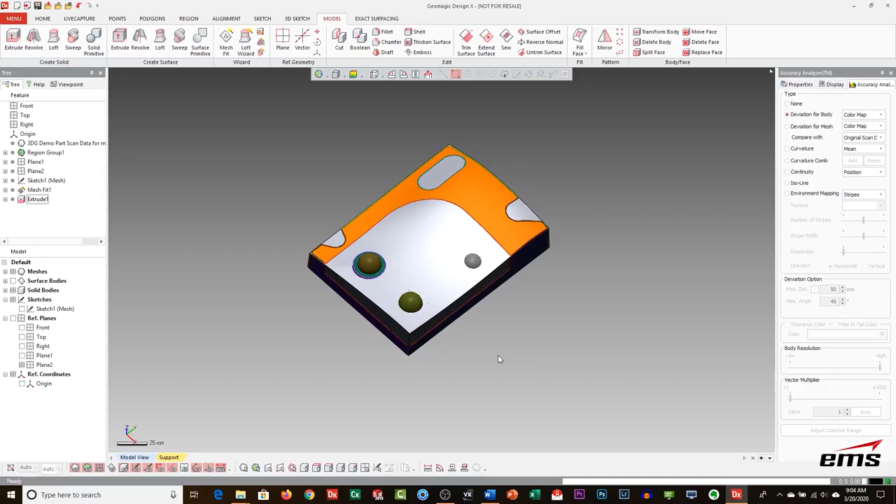So let's click draft. And again, that's always the beauty of history tree modeling is you can roll back. Now, we can do that deviation analysis, and this time we're doing it on the whole body, so you can see what we have here. I can highlight over, but let's look at our sides, and we can see what we have here.

So you can adjust this accuracy to whatever you want, but that'll show you what that looks like. So let's go ahead and work on some of these primitives like we did on the other one. I'll hide the solid body for a minute. Similar, we have this primitive tool, and we can automatically extract shapes. So again, just a lot of depth of the product, or we can extract a specific shape. Let's start with the spheres.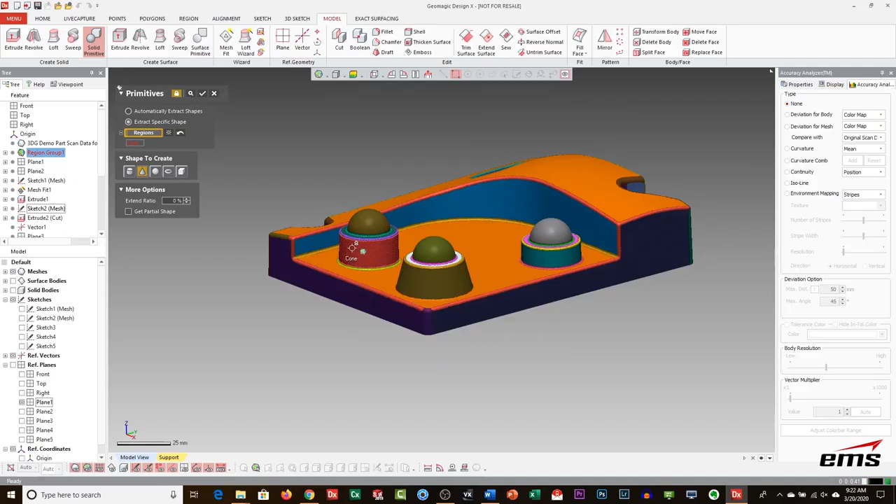One nice thing is I can lock this tool so that it stays open, so I can just keep picking things and working. So I use that quite a bit. Now we want to do the cones, and we're going to want to extend them out like we did before. So I don't know, let's go 15%.

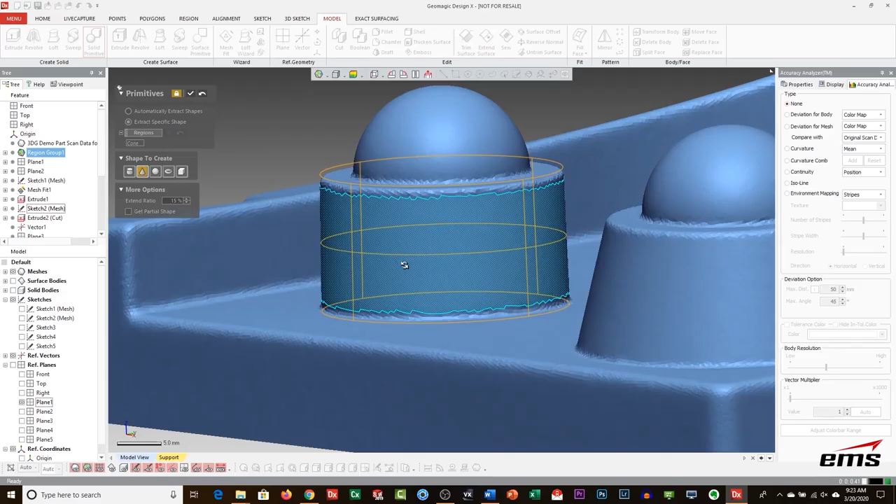And we can also do a preview to see what that looks like, so we don't commit to it, and we can go back. What's nice about that, when you're doing some of these commands, we get into really big data sets, it can take a while, and the actual preview actually works a little faster. I'm not sure how, but I've been told that it will do it faster, maybe because it doesn't write it out to disk or something.

But for this, it really wouldn't matter. But if I was working with a really large data set and wanted to execute a command quicker, I can do that preview, and then once I like it, I go ahead and hit OK. So let's do this one. And again, I could preview it if I want, but I believe that should be fine. And then pick this one here and hit OK.

All right, so let's go ahead and we can unlock that and turn it off. So now we should have similar geometry as we had before. And we're going to need a plane.

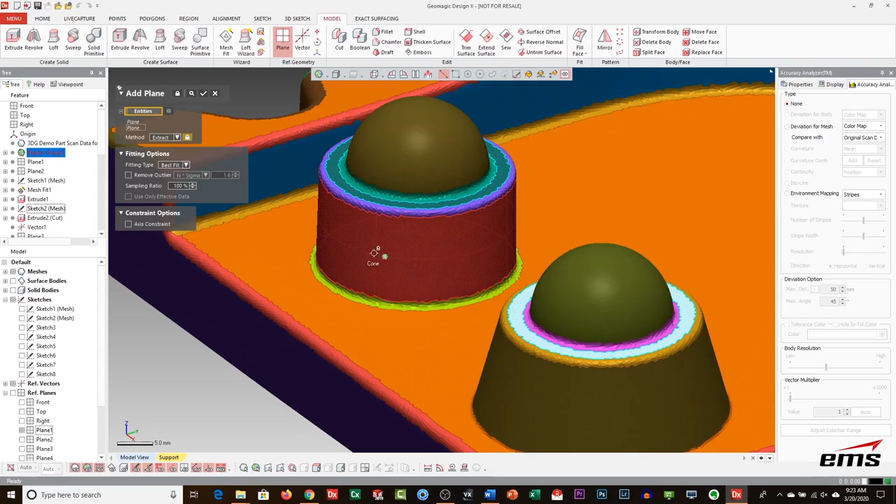Let's hide this. So we will go to plane. We will go to extract. And again, we'll pick this region group and this region group, just trying to do things the same way. Okay, and then repeat the command on this region group there. Okay, so display those planes. And then bring back the solid bodies, hide the mesh.

And it's going to be the cut command. The tool will be the plane. Target bodies will be this one and this one. And then it's going to ask us what side to keep.

And then we'll do the same thing over here. Target body. Next step, what side to keep. It's kind of hard to see because it's so thin, but I'm picking. You can kind of see the bottom piece there. Okay, so we have those.

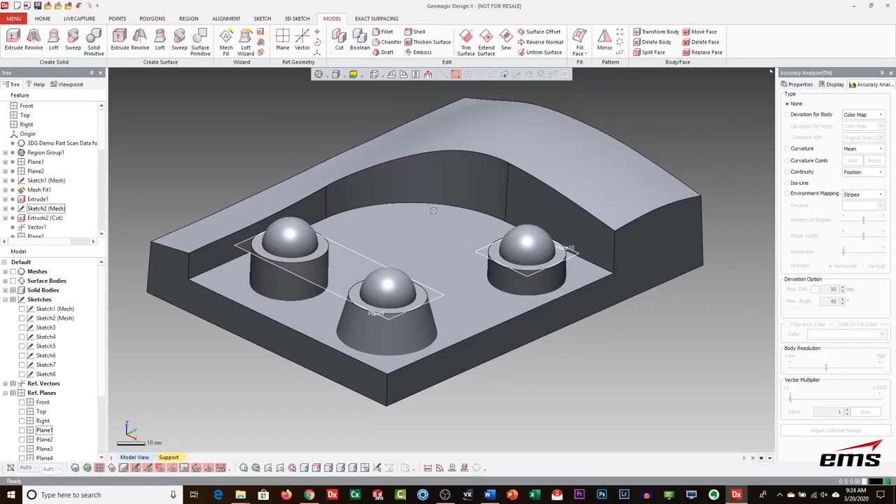And then for the rest of it, we can just do a Boolean. We're going to do a merge, which is like a combine. Select all and hit OK. So we've got those. Let's hide our planes so you can see what we have.

Now, I'm going to show one more command. I didn't show it in the others because it was just, which is the fillet command, because you just say fillet and then you pick an amount. What's really neat about this product is I can pick this fillet, and it's coming up with 2.54, but that's just whatever was in there.

If I click this little button here, it's actually going to go look at the scan data underneath, and it's going to average or evaluate it all the way along that curve and then come back and tell me what it should be. So that can be very powerful, right? And you can get into variable fillets, face fillets, full fillets, etc. This can be a very handy tool. So now it's come back with 1.2052. I can say, well, I would guess the designer made that 1.25.

So I can override it, but what's really neat is I can sample that data underneath to get that. So then we just go around, we would add all the other fillets and then do the other cutouts, like we did on the other two products.

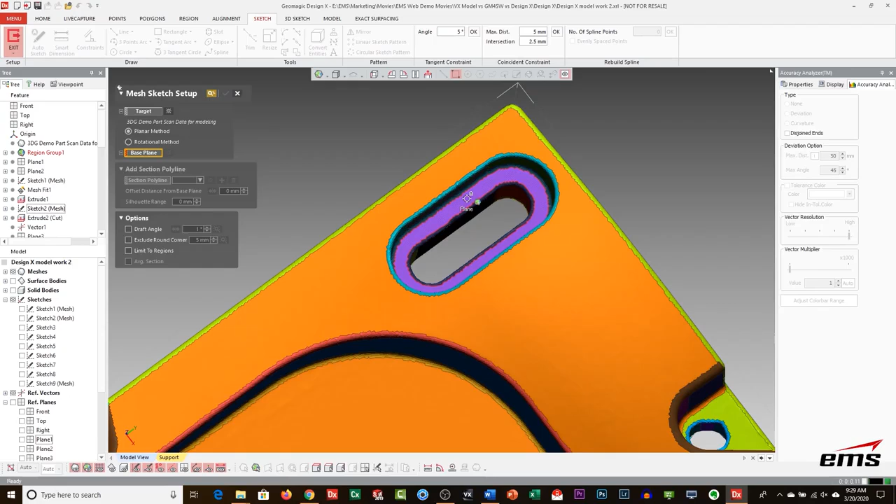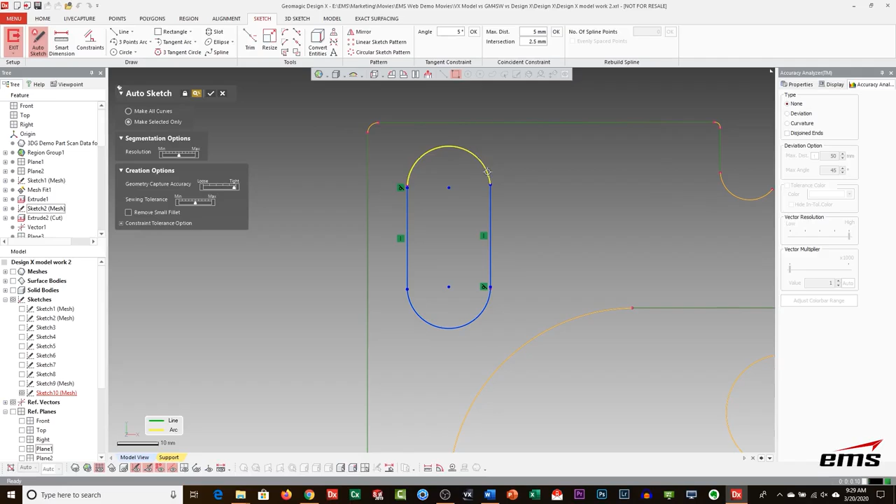Let me show a couple extra things with some of this geometry. If I go to sketch and say mesh sketch, I don't even have to build a plane ahead of time. I can just pick that region group, slide it up a little bit, and hit OK. That mesh sketch is right on that region group. Then I can use this auto sketch command, window in, and it'll automatically build the sketch for me. This works great on basic geometry. When you have really rough scan data that's full of holes or really complicated, it doesn't work as well, but it's a nice productivity tool. You can see it quickly was able to do that.

I've got my sketch. I go back to my solid, and in this case I'm going to extrude up with a cut. You can see it's very quick.

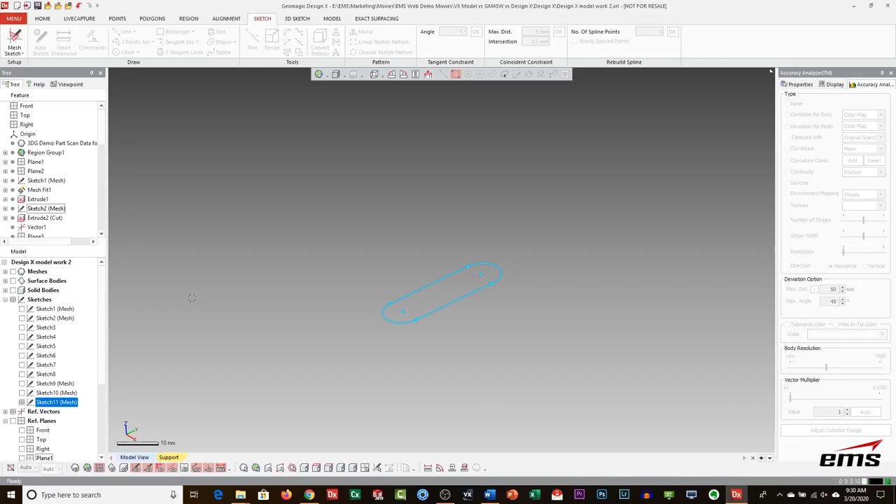Let's do the bottom one as well, same type of thing. I'll come in here, sketch, mesh sketch, pick the region. This time we're going to sample down a little bit, hit OK. Come over here, hide the mesh, come in and do auto sketch, window that in, hit OK, and you can see just how fast I have that. Bring my solid body back, and we are going to extrude this time the other way with a cut. I already cut this one over here, but that just shows you how quick you can get those reference sketches and then use auto sketch or the other sketching tools.

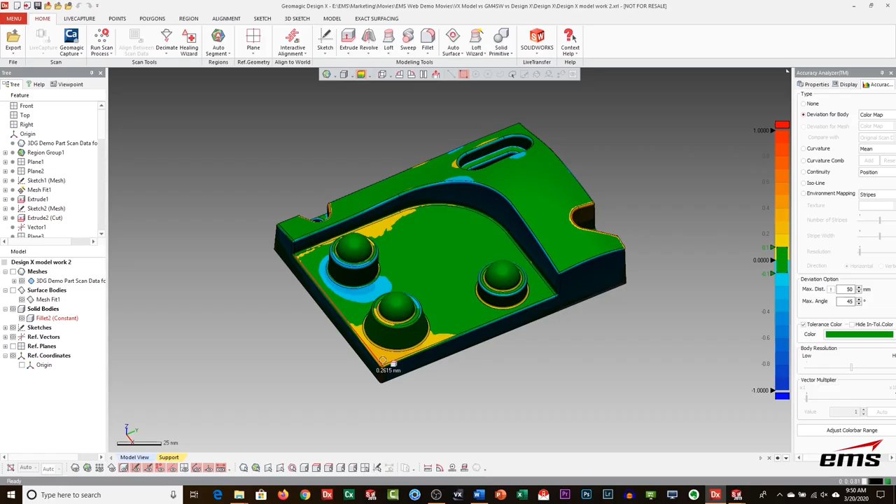So we've added all of the fillets and finished up this model. Let's do one final deviation analysis just to see how everything looks, and overall it looks pretty good. We can highlight over, as we've shown before, and look at the deviation. We know we've got issues here, but that's on the part, and we always want to design back to the as-designed state. For example, this should be a plane, and we don't really want to follow those imperfections in the part. So overall, everything looks good.

Now we're done. Let's say we want to go to downstream applications like CNC machining or something else. We can come in here and click export. We can pick our solid body and output neutral CAD formats: IGES, STEP, Parasolid, even CATIA in a native CATIA format. The only issue is it's a neutral file, what people call a dumb model or dumb solid, because there's no history tree. For a lot of things, that's fine.

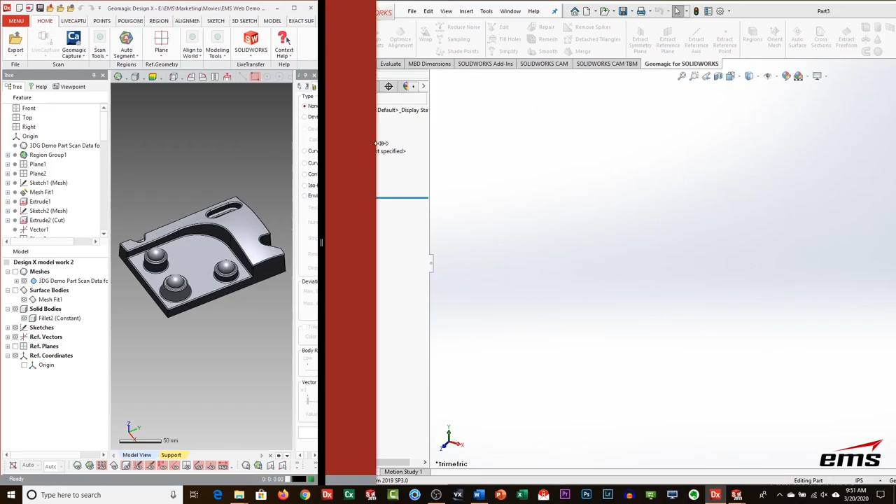But if we're going into a CAD system to do assembly modeling, dimensioning, making drawings, or we think we want to make changes to it later, it would be nice to have that history tree. So what I'm going to do here is slide this over a little bit. What I've got over here is SolidWorks, and we're going to do what's called a live transfer. I'll go to File, get this started, and it's going to be a live transfer. That'll go to SolidWorks, NX, Creo, AutoCAD, Inventor, Solid Edge, and again CATIA native format, but without a history tree for these last two.

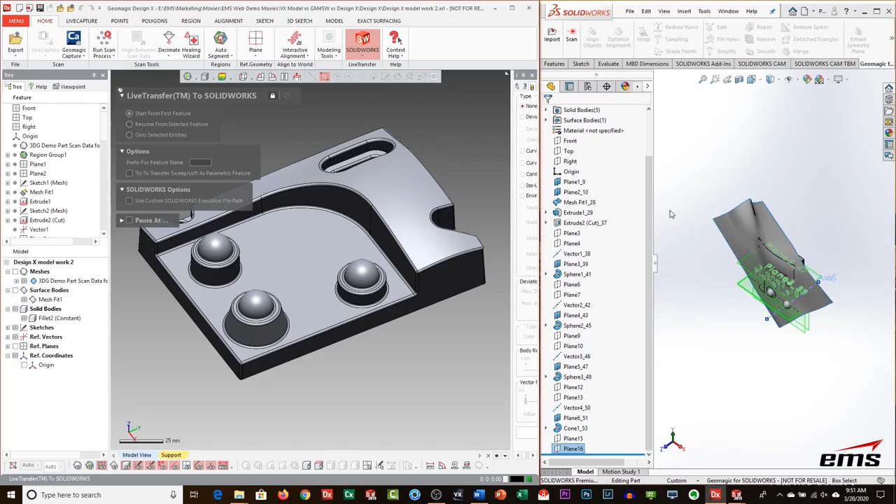Because what this is going to do, I'm going to tell it to start with the first feature. It's actually going to roll back the history tree in DesignX, and you can see what it's doing over here in SolidWorks: it's rebuilding, and look at the tree being populated. So it will actually rebuild everything in SolidWorks with that history tree, making it possible in SolidWorks or whatever native CAD system we support to roll back and make changes to it.

Very powerful. It takes a few minutes, and once it's done, you can see we've got the history tree here and our model in here with everything. So this is very powerful, being able to do all the modeling in DesignX and yet still get a history tree in the native CAD file system.

So that's DesignX. Okay, so just a summary on DesignX. If you look at the benefits of DesignX, it is certainly the most powerful reverse engineering software out on the market. It has extensive point cloud tools, alignment systems, all the solid modeling tools you need, all the surfacing, including some pretty advanced surfacing, and the ability to work with very large data sets.

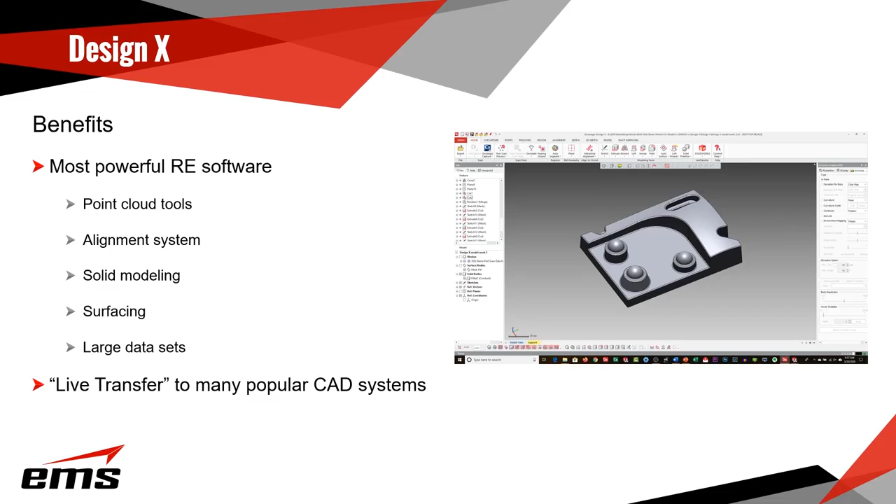When you get into some of these long-range scanners, you can get into gigs and gigs of data. And then it has the live transfer to many popular CAD systems so that you can retain that history tree if you need it.

Now, some of the things to consider with DesignX is there's going to be a learning curve. Even if you know SolidWorks or another solid modeling system that's fairly similar, there's still a lot of stuff you'll have to learn, so there'll be a steeper learning curve. It is the most expensive product of all three of these, and it's still going to require a CAD system because, again, it doesn't have drawing tools, assembly tools, all the other things you might use in CAD. If you were just doing reverse engineering and going straight to CNC machining or something, or some other application where you don't need drawings and assemblies, then you'd be fine.